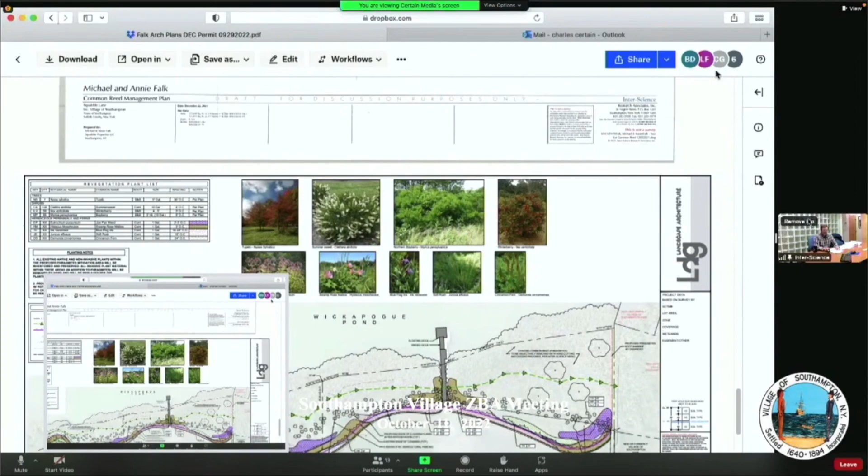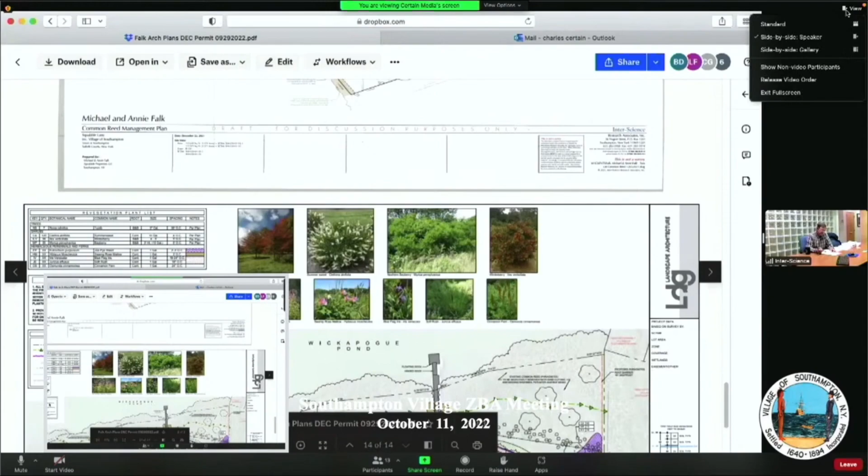Above the wetlands line, we have various wetland shrubs and plants proposed: blue flag iris, Joe Pye weed, soft rush, cinnamon fern. Those are parts of the passive restoration. But then there are native shrubs that will also be planted.

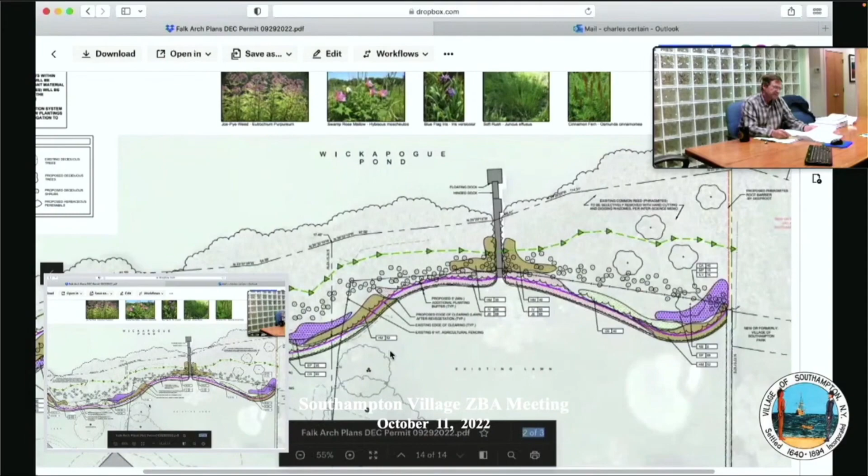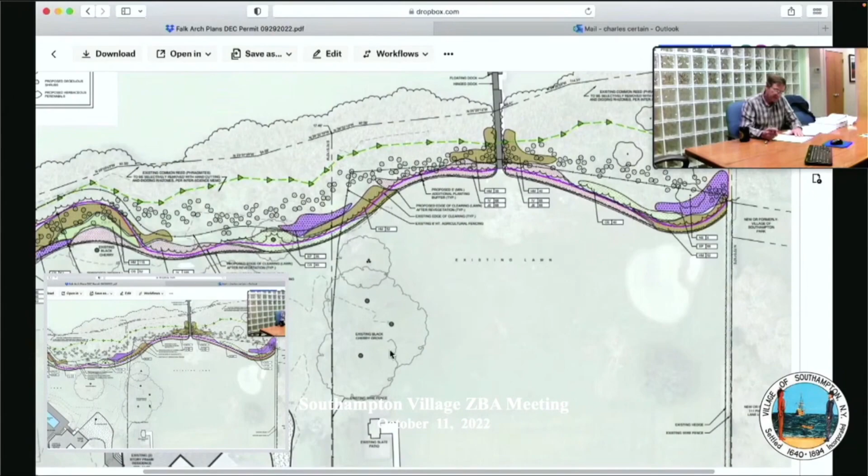There's an existing fence on 12 Squabble Lane, and we would like to retain that fence. On the other property, there is a fence that goes high up into the property, and it looks like an area that was used to put landscape debris over the years. What we're doing instead there is installing a new fence, and planting new wetland shrubs and buffer plantings above the wetlands line, and installing a fence.

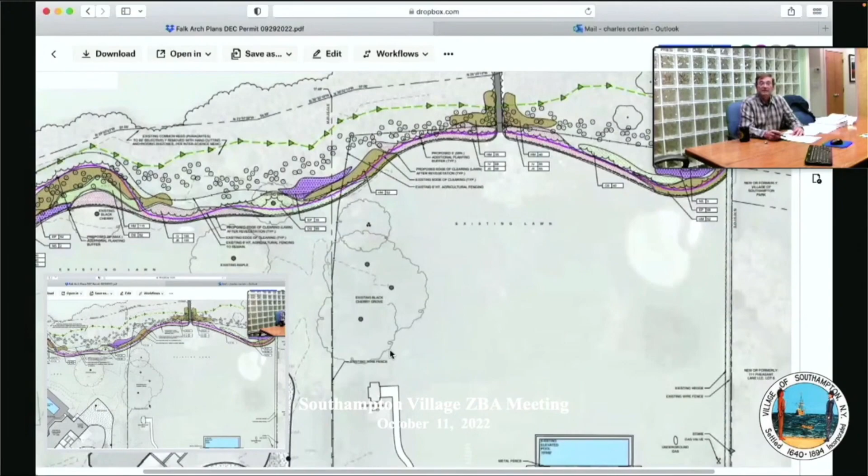Now, this property had been managed prior by Bruce Horwath with pretty good success. The only problem was for the people on Wickapogue Pond shoreline that had the permits to do that work, it wasn't continued. So the problem is finding property owners who are willing to continue the maintenance and keep cutting the common reed down until the whole thing succeeds. And that's what you see on the plans by the landscape architect.

LaGuardia Design shows plantings on the uphill side of the fence as well, and that is to hide the fence so they don't look at it. It's mostly swamp rose mallow, which is already present there and in pretty good shape. So what we're going to do is add to that.

The deer fence should be obvious. It's to encourage the deer to run along the shoreline and not in the landscape portions of the property.

There are two areas that need other attention, and those are root barriers on the north and south property: north side of the property for 12, south side of the property for 10. That is self-explanatory, but what it does is prevent the common reeds from coming back across the property line and reinvading

the new wetlands. When Bruce Horwath did the work years ago, it was very successful. There was a huge amount of freshwater wetlands vegetation that came back, and I went down there and looked several times. I don't really recall why, probably because I had clients in the area.

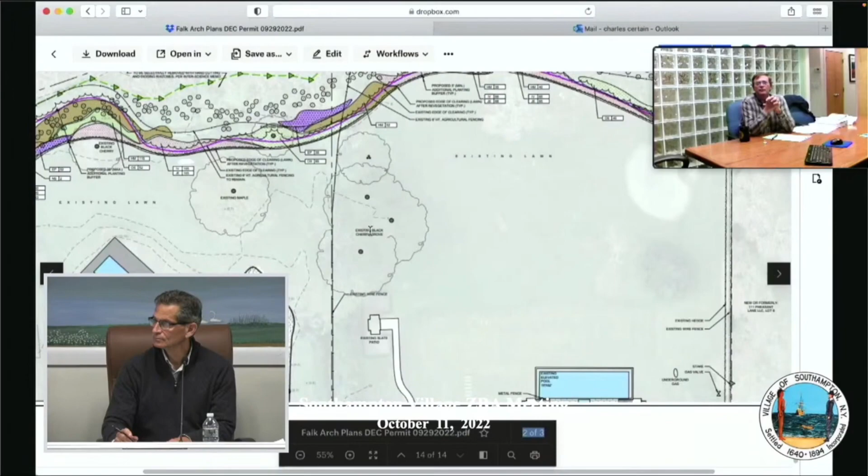But we're going to try to get that situation back in play, and we have two property owners that are willing to pay for the maintenance that's required for these kinds of projects. So Michael and Annie Falk should be thanked in some respect, because this is a good environmental positive project.

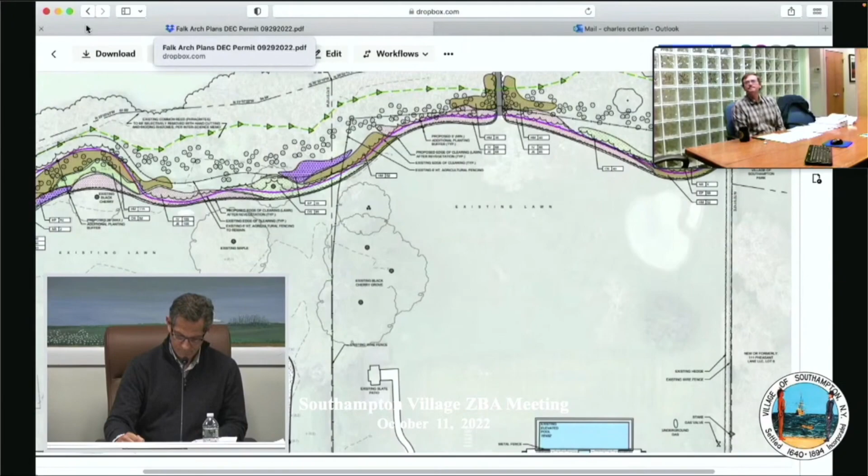I think we have given everything to the board that Chick Voorhis has asked for. So we would encourage you to close the hearing and issue a permit so that we can start the project, say, in January, February this year, using the New York State DEC permit and the village wetlands permit. I'm here to answer any questions you might have.

Chick, do you want to speak to this? Sure, what Charles suggested earlier.

I thought it'd be helpful also to supplement Jim Walker's presentation by going back through some of the materials we had talked about very early on. Jim submitted a very conceptual plan, and so we had some discussions in April and May, and it's been adjourned ever since then while he was getting the input of the landscape architect.

But at that time, we had suggested root barriers on each side of the property to prevent Phragmites rhizomes from coming into this property. That is now shown on the plans, as Jim said, but that was one of our original requests.

We had also requested that the wetland line be updated. That was flagged by InterScience, checked by my office, and has been verified, again, since the April and May meetings. We asked them to inventory the existing vegetation on the property so that we were ensuring that we considered

materials that were good and native and could retain them as part of the restoration plan. That has been done. You can see existing trees shown on the property, and also the narrative talks about the selective cutting and how that'll be handled.

We also asked, based on an original plan, if the buffer could be expanded. Keep in mind that this is a voluntary restoration of wetlands to try and increase the productivity and make it more environmentally beneficial. But since the alignment of the original restoration, Jim and his team did expand the buffering.

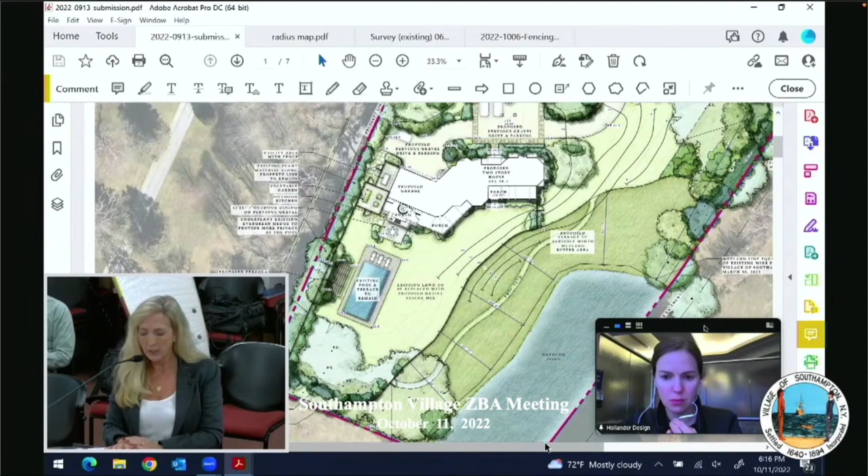Want to zoom in a little bit, Melissa? Sure. The other purpose, we were also asked if we could take another look at the pathways in the buffer. Originally we had more pathways, and they were a little closer to the wetlands. We've now reduced the pathways. They're only 4 foot wide, and they've also been shifted further upland. We have a net reduction of 72 linear feet of pathway. Originally there was 285 linear feet, now it's 213 linear feet.

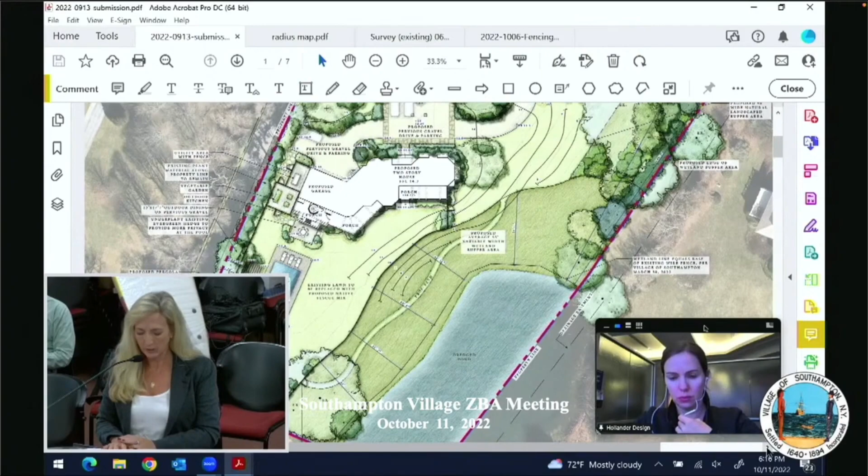If you could now point us to the landscape, natural landscape area. During this process, it was brought to our attention that apparently during one of the older reviews and permits issued in 1997 for the swimming pool, not only was there a requirement for a 20-foot wetlands buffer, but there was discussion about a 50-foot natural, quote-unquote, landscape area, which to this date neither Chick nor I understand what it means. When we met on site, we didn't understand the purpose of it, because environmentally it doesn't seem to make sense, but either way, we weren't made aware of it until this whole process started. There was a certificate of occupancy issued June 28th of last year to the current owner when he purchased the property.

Again, not aware of this. There were no violations issued in the title report. My company wasn't involved in the purchase of the property, so we hadn't done a FOIL. During this process we did file a FOIL, and we were given a copy of the original approved map, which showed the 20-foot buffer and the 50-foot landscape area. But there was nothing about a violation. I don't think Chick had the same situation I did, where the violation wasn't found until we actually physically asked to see the file, which I think was June or July, where there was a piece of paper from John Foster stating that.

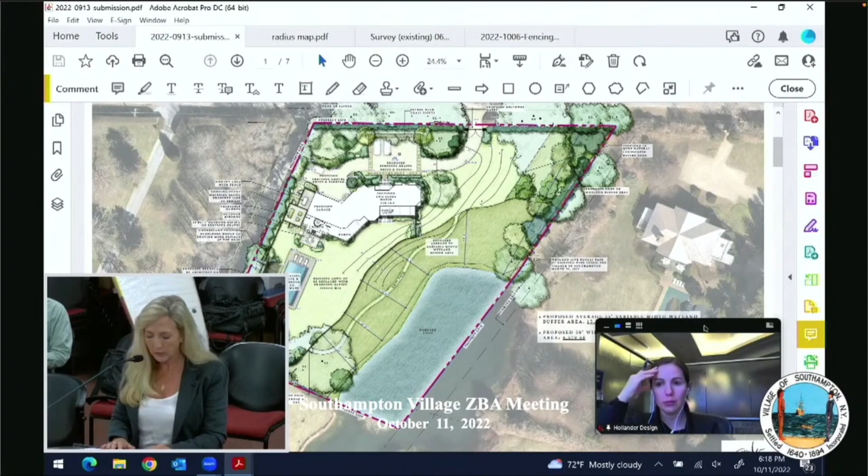That being said, we've now come around, and we would like to revegetate that area. We would like to reestablish a 50-foot wide natural landscaped area planted with native plants designed by Ed Hollander's office. That results in an additional 4,579 square feet of native plantings. The lawn that's currently there, since we're going to be doing site drainage, a new geothermal system and everything, we would also like to replace the existing lawn that's remaining, which would reduce the lawn area here, with a native fescue mix. So in essence, we're increasing the buffer by making all the lawn and the wetlands buffer native plantings.

Melissa, do you have anything you want to add to that? No, that was a pretty good overview. The only other landscape change that we made was to the fencing, but I don't know if that's still next on my list, or if you'd like me to address it. Okay, yeah, actually, well, there was a question, do we want to zoom in on the fencing?

So there's a question about the fencing along the driveway that's to the west of the property that leads to the back flag lot. We actually went out, and Melissa, could you show the photographs? We submitted this to the board.

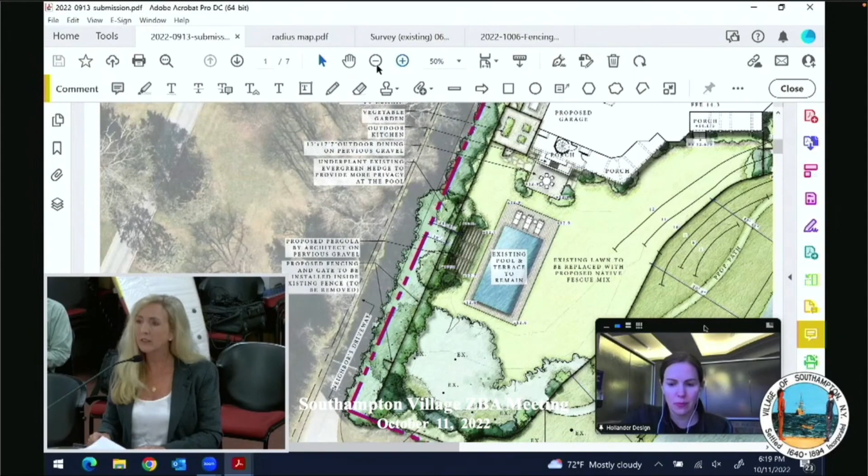We actually had that property line staked out to confirm that the trees in question were on our property. We submitted an 11 by 17. If you zoom in on the upper right-hand corner, you can see the stake there next to the call box.

The property line is pretty much 2 feet off of their driveway, so all that vegetation is correctly shown on our original survey and is on our property. However, just to be helpful, we've decided to install the new fencing about 10 feet off the property line and inside the existing fencing, which will be removed. The existing fencing is pretty much wire fencing, you can see it right there.

So we're going to install it inside from there, and we will maintain the southern fencing that's along the property line between us and the flag portion of that property.

Ms. Stevenson had a question about if we could go to the FEMA, the zoning compliance map. Sorry, there's a little delay. It's okay. Can you zoom in on where the FEMA is on the existing house?

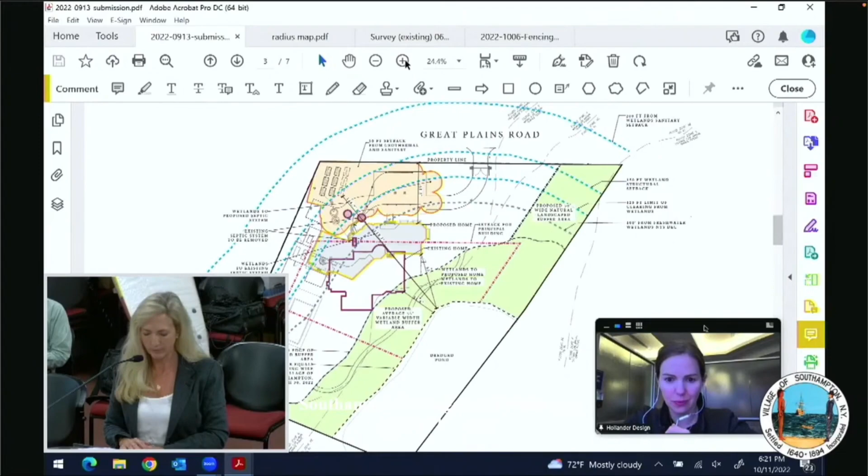With regard to the other structures, we're not making any changes from last time we spoke with this board. We're still asking for the front yard relief to maximize the wetland setback. I did provide an analysis of the 5 criteria for requesting that relief. I can go through it again, but it has been provided in written form.

The main reason is really to improve the environmental conditions. Again, the proposed house height is going to be 29.7 feet, where 35 is allowed, and the current house is 33 feet.

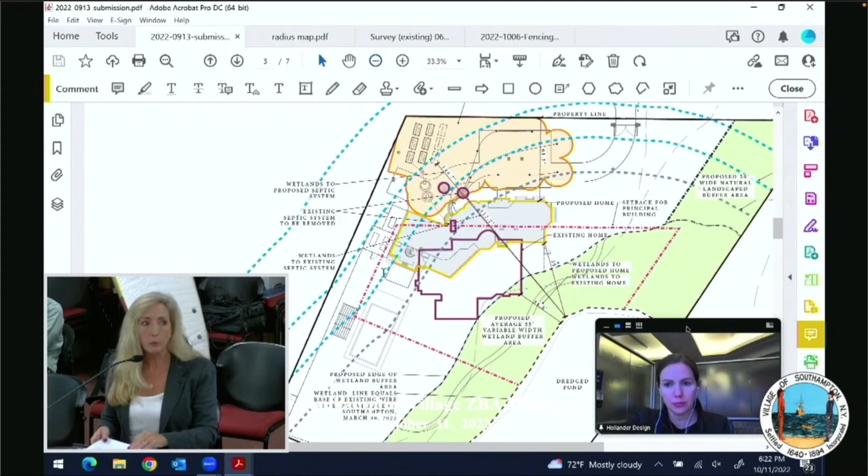The other variance we were asking for is for the open-air pergola, which, if you combine it with the 20-foot wide flagpole, then it actually exceeds the 30-foot required setback. We feel the pergola, since it's open to the air and open on the sides, is as far away from the wetlands as possible, so it's between the swimming pool and the driveway to the west.

Want to go to the next picture? We can talk about the planting plans. Or which one do we have next?

This is just our overall drainage and grading plan. Again, we're going to be improving the septic system. You also should have gotten the updated wetlands setbacks, which are the same. I added onto that the proposed buffer area for both the natural landscaped area and the wetlands buffer.

Melissa, you want to go over your plantings? Yeah, just one thing to note here: the last time we were in front of the board, Chick made a really good note about limiting disturbance to habitat within the wetland, and we really took that to heart, not only in the reduction of paths, but we went through and added a lot of native shrubs as well, so that we could provide more shelter for native fauna in this space. So we've added additional planting to the buffer since we last met.

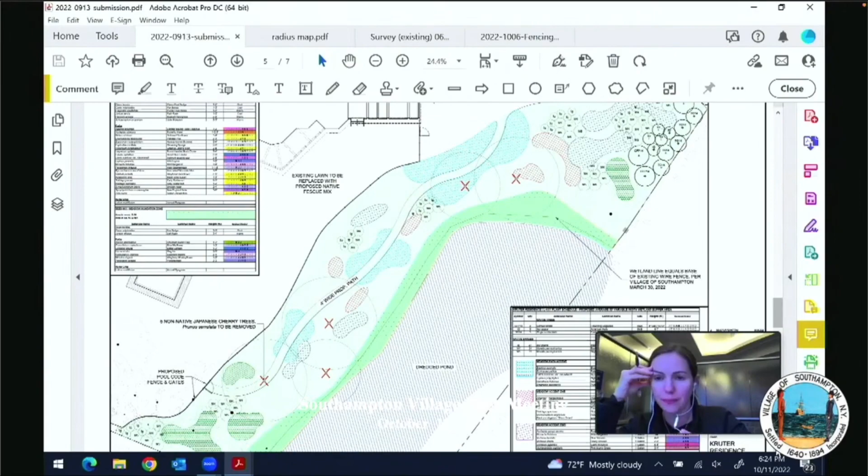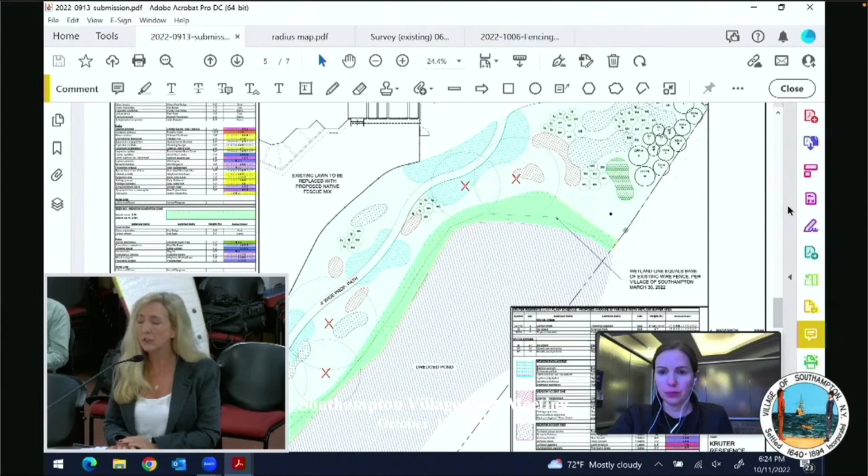I also want to add that in our original application, I don't know if this got lost in translation, we did provide the board with a tree inspection plan done by Bartlett tree experts. They inventoried the 5 cherry trees that we wanted to remove because they're in poor health, and they did a whole inventory and agreed with us, and they had been maintaining the property for many years. Melissa also provided a timing and methodology for the wetlands buffer installation.

You want to go over the natural landscaped area, the planting plan?

Since we last met, we added planting to this natural landscape buffer area. This is 50 feet of planting on the northeast property line, and we're taking a lot of the same material we were using in the buffer and extending it.

So this is just a natural extension of the remediation we were already doing here. Do we have the radius map next? Okay, here I just want to point out where the property is, it's kind of hard to see on this. Do you want me to zoom in? Yes, please.

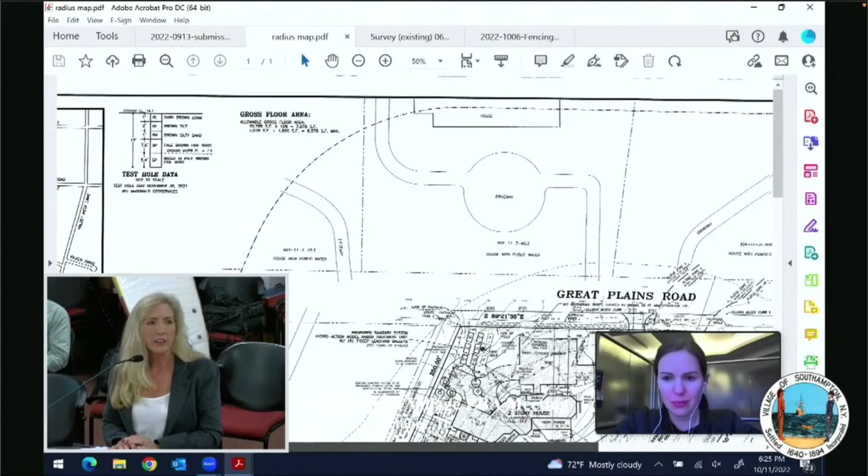I just want to remind the board that when our client purchased the property, can you go to the drainage area? We've actually staked out the drainage area. Our client, when he purchased the property, had thought that he owned all the way to the hedgerow, which we've talked about at the last hearing.

So that 20-foot wide area is going to be allowed to passively regrow, and then we're doing the 50-foot on top of that. So between the wetland area, the landscape area, and the pond, almost 45% of the property is going to be native natural area.

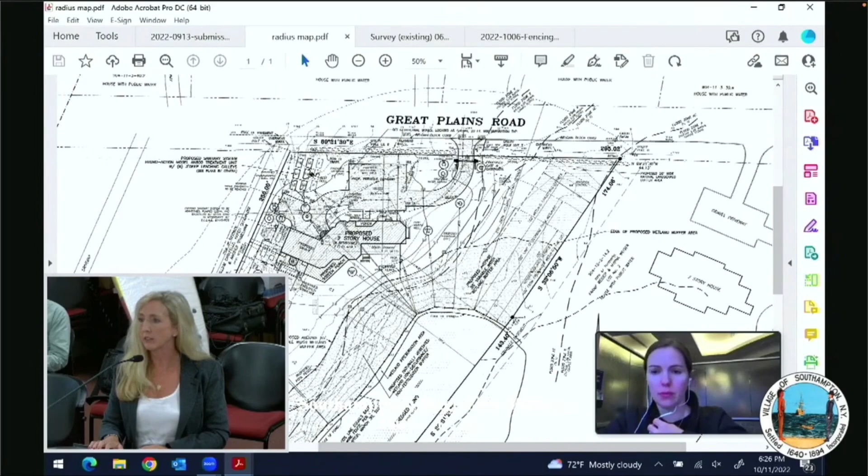I also wanted to show where the southern fence line is, just so they understand the area we're going to be keeping, that one southern fence. Yeah, right there, and that's just going to be maintained. We're here to answer any questions from the board.

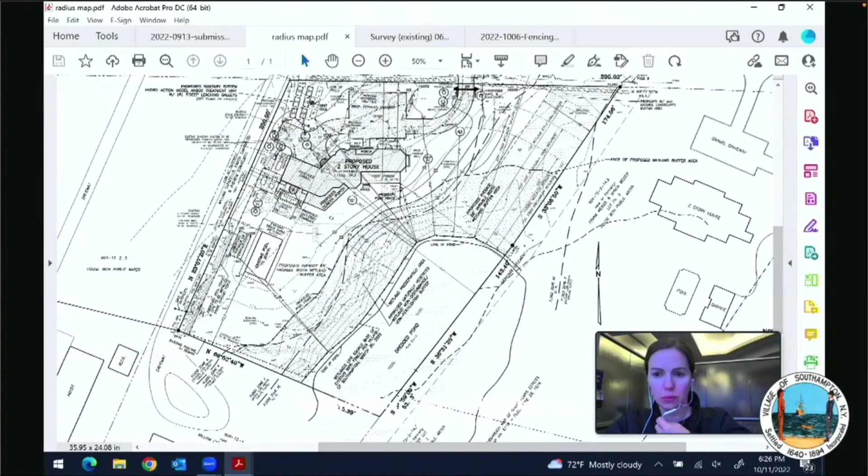Do any board members have any questions? Julia, Susan, do you have any questions, Luke? No, I have no questions right now. Julia or Susan, do you? Not now, Mark.

Okay, so I'd like to hear Chick's comments on the plan at this point. Why don't you go, Chick? Sure, so this does have some history. My notes show that... you might have to step up. Want me to go up there again? Thanks, Charles.

There was quite a bit of history. My notes show that we had originally adjourned this in May. There were some discussions that involved having the applicant seek a front yard variance to expand the setback to the wetlands. You may recall the original application met the 80-foot setback, but the house was rather close to the wetlands. So we further discussed it, talked about looking to comply with setbacks as much as possible, or seek a front yard setback, which they have done, expand the natural buffer, and then research that 50-foot easement to the east.

So we did receive updated surveys. There was a resubmission, the property was reposted, and Melissa presented it this evening, basically documenting all of those changes. I think it would help, and I hate to put the burden on the applicant, but there was a really helpful comparison chart that is part of our record, and I think it might be good for Melissa to go over that here at the meeting, because there's existing sanitary systems, there's proposed drainage, there's expanded buffers, and that information is good to have on the record, not only in the file, but in the written record.

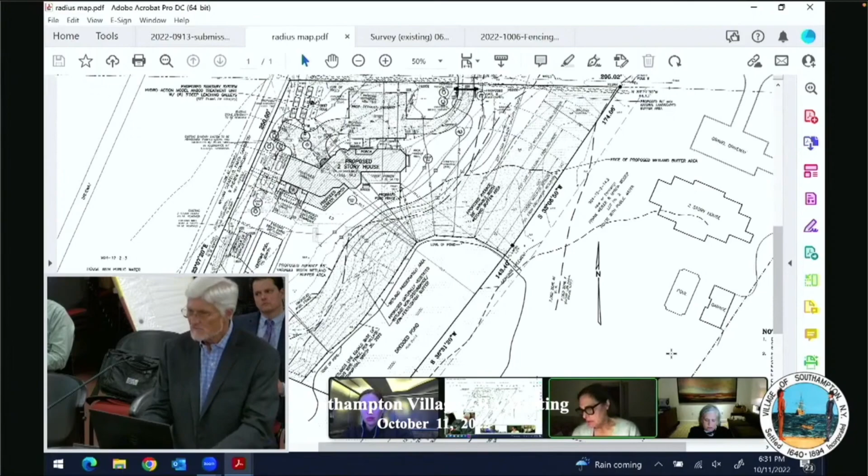I don't know if, Mark, you want to hear about, I thought that setback comparison chart was useful. We do have it in the record, but Melissa can go into it in more detail if it's helpful. Actually, what I'd also thank you, Chick.

The only thing I'd like to also state is that this property, which is unusual in this area, is actually undersized for this area. It's an R120, and this is a 70,785 square foot property that's also impinged with a man-made pond. So we really have tried to balance working with this board to get a reasonable house that is not maxed out in size or height.

The other thing I'd like to add that I forgot in my presentation, and Melissa forgot, is that if you combine the 50-foot new area, naturally planted area, we actually ended up with an average 75-foot wetlands buffer. So if the board would want, we could covenant that. Now, remember, the original wetlands buffer for the pool was not a buffer per se, it was just a net, but after planting it, we are more than willing to covenant both the 55-foot average width buffer as well as a naturally landscaped area, if that would make the board feel a little better about all this.

Since the lot is undersized, did you qualify for 4/10 relief? No, because of the street width. Got it. And I could go over some of the setbacks.

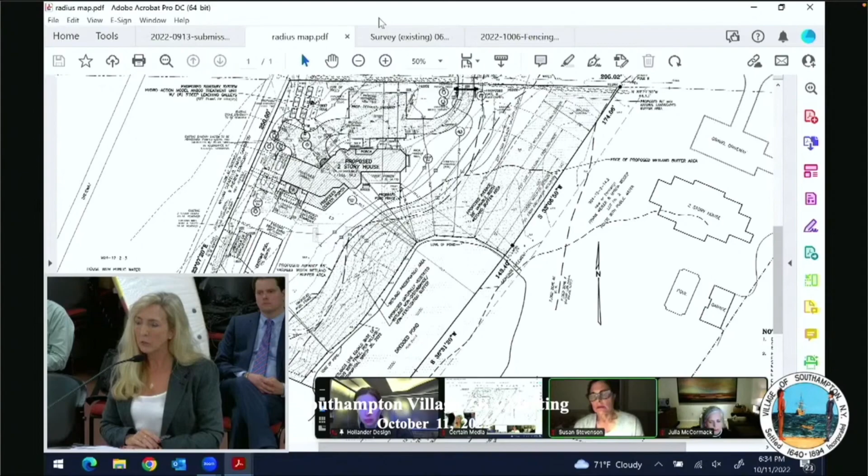But isn't the fact that, as I was talking to my associates, we weren't aware of this, the client was not aware of this, the client's closing it, we didn't represent the client, the attorney wasn't aware of it. So how are we supposed to be aware of this? That's number one, but number two is, aren't we, by us being here, rectifying it, because we would need a wetland special permit anyways to do the work. So I think this is a win-win for both the village and for our client.

And again, we're willing to covenant the buffer that was established for the swimming pool, which is only 20 feet, was not covenanted actually. So now you're going to have a 55-foot covenanted buffer along with the additional native planted area, which ends up in an average width of 75 feet on a very small lot. Again, 45% of the property is going to be natural. No, I understand.

So the question I have for either you or Chick is, and I understand you were not aware of it. I'm not saying Chick's a mind reader, I can't, but it's in the file, okay?

The reason why we're aware of it is because there's a file that has a decision from the zoning board that required compliance with a condition, and in addition to non-compliance with the condition, there was a letter issued by the building inspector notifying the prior property owner that the property violates this condition or does not comply with this condition. Right. It's in the file.

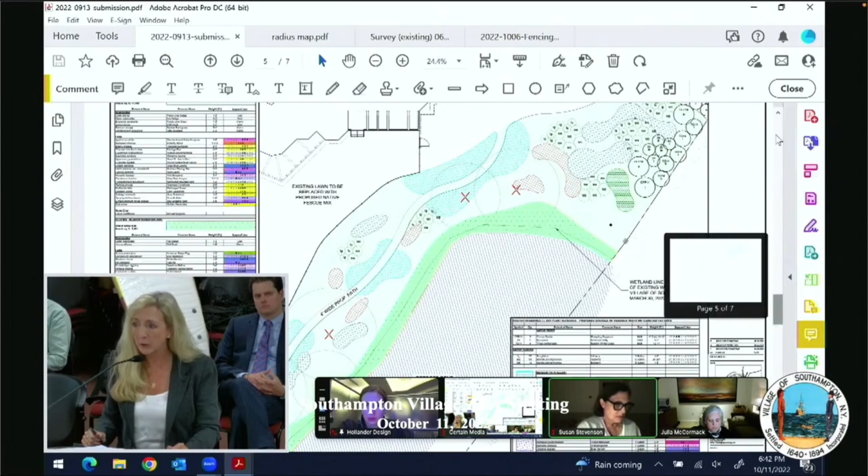I think when you have the net, as it's moving here, as it waves around and everything, it looks more natural. It looks like a more natural shoreline. It's more aesthetically pleasing. It provides just as much environmental benefit with habitat, with food, with shelter for the animals. And on top of covenanting now that 50-foot, like I said, covenanting it, you're going to have an average 55-foot. And that provides a wildlife corridor from the street down to the pond and around the pond.

So I think there has to be a balance. That's what I'm trying to balance. If we had a bigger property, heck, I'd give you 50 feet, but I don't. And we're trying to have a little... The balance that we were trying to...

Facilitate was to say to you, you can go 60 feet from the front yard, okay? I thought in exchange for that additional 20 feet, you could accomplish a minimum 50-foot wetlands buffer, okay? But it is greater than 50 feet on both.

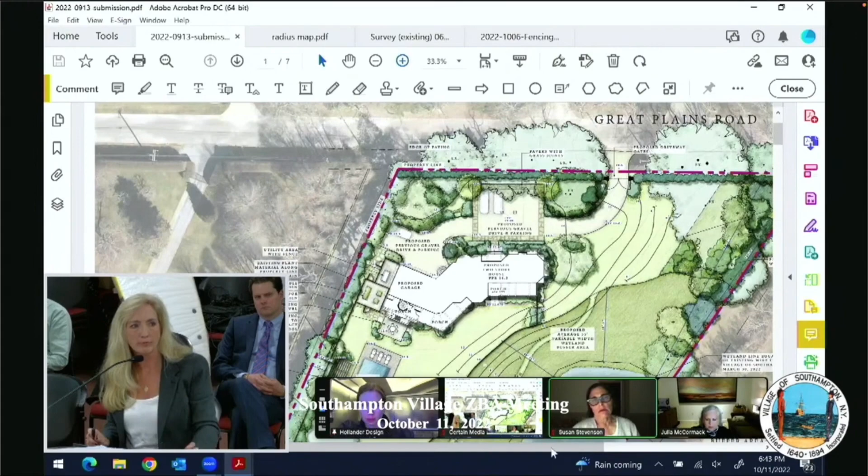Actually, Melissa, we have pictures on - is there any way to bring it up so you can, the whole lower end - actually, can you bring it up higher, Melissa? I guess, what's the buffer at the northwest corner of the pond and the southeast? See, it flares out. Can you bring it up higher? Yeah, let me know if you can see it. No, I can't, you have to bring it up higher.

There you go. We're doing all plantings down there, trees there. Let me just step away here. This isn't necessarily buffer, but it's all planted. And we bumped this up and everything, and we're trying to make something that the client's gonna love to maintain as well. That's half of our battle too, and Chick knows this too when we have clients.

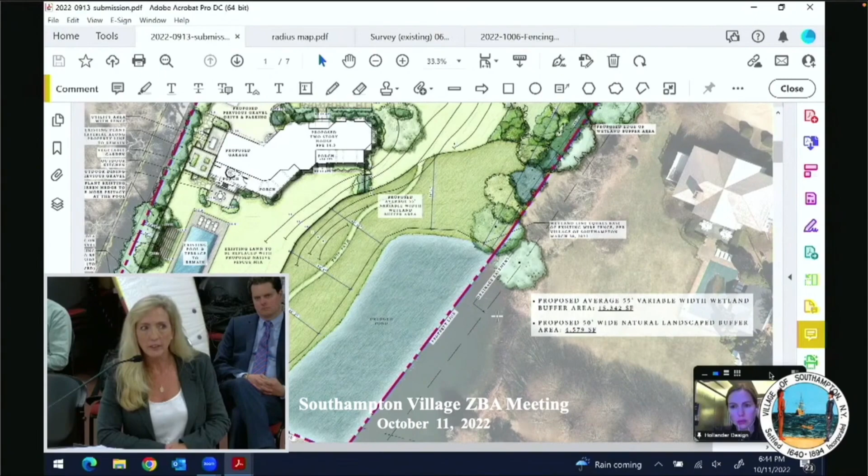And we really thought it's a beautiful project. I really thought with the additional planting, the shrubs - I'm sure Chick can tell you how, it's not an inexpensive restoration. And I'd love to have Chick comment, but I think what we're showing here, especially adding in the 50-foot natural area that we're going to covenant, provides a lot more benefit, I believe, than just having a straight 50-foot line around the pond.

Melissa, what's the buffer depth at its narrowest? Melissa, do you have that thread? I can't read this. Yeah, it's 43 feet 11 inches. And is that at where the fence is to the house to get around so they have a gate?

Yeah, I think it's right there. Yeah, right. So this is 20 feet off of the corner of the building to the edge of the wetland area.

I just want to add one note to Melissa's review of the buffer area. The one thing we try to keep in mind when working on these variable width buffers is that when we expand them in areas like this, we're trying to do that where we're limiting runoff from the property. When working out the grading plan, the majority of our runoff is towards the back of the house and the side where you see some of our grading.

So increasing that allows for more area for that water to run through before it gets to the pond. There are some benefits in creating these variable widths, so we can create larger zones for that runoff to go through, for absorption. That was one of the things we were keeping in mind.

Chick, would you like to comment? Chairman, would you like? Sure, go ahead, Chick. Well, yes, both of us, so.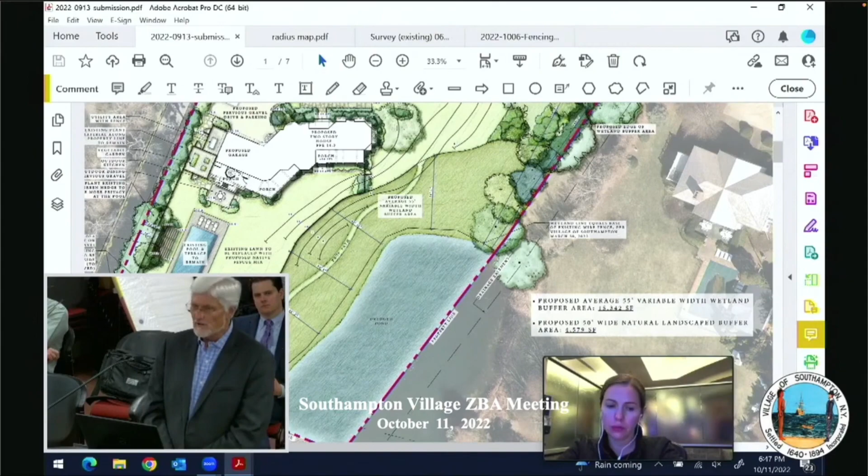Also, one of the local South Fork jurisdictions, the village of Sag Harbor, actually codified kind of an average buffer concept. We don't have that in Chapter 116. It's pretty explicit that we look for the 125-foot landscape, 150-foot structure, 200-foot sanitary, and clearly this does not comply. So those are kind of the two sides to it.

I've heard the environmental discussion, and I agree with a lot of that. We are improving the condition, but I have to go back to some of the original challenges that this board gave the applicant, to get a 50-foot buffer.

And we have an average 55-foot buffer, but we have a minimum that is less than that. So again, I would challenge the applicant to do better and get closer to what has been requested and what we've talked about. That's really what I can tell you at this time.

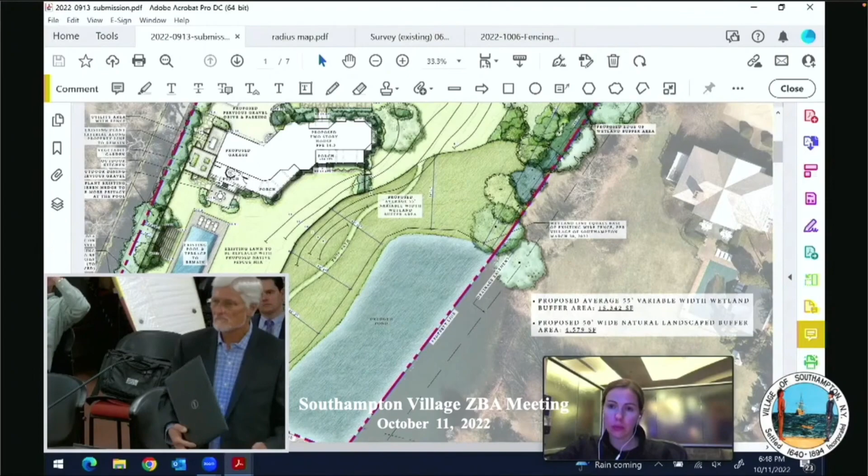Let me ask this question - it's a tough one. In other jurisdictions, is 50 feet the minimum buffer you would recommend, or is it sometimes 75 feet? The village of Sag Harbor has a 50-foot wetland buffer, but it's a very different village. There are many small lots, mostly developed. So that's kind of the difference there.

The DEC just has a 100-foot jurisdiction area, and anything in that area is subject to permits. If you're in tidal wetlands, they have a minimum setback. But none of their regulations have a minimum buffer, which I find interesting, but they look to get as much as possible. And obviously the town of Southampton is very similar to the village of Southampton with 125 feet.

So what might the town require with respect to a buffer? Well, I don't want to try and get in the head of the chief environmental analyst, Marty Shea. He's very tough, and he looks for the maximum, and he would look for maximum buffers. I can't tell you the number he would look for here, or how he might arrive at a decision on something like this, but again, we're very close.

When Melissa and I were listening, both of us arrived at something like 40-something feet. I'm just wondering - the question might be, have we already asked for what any jurisdiction would require as a minimum, which is 50 feet?

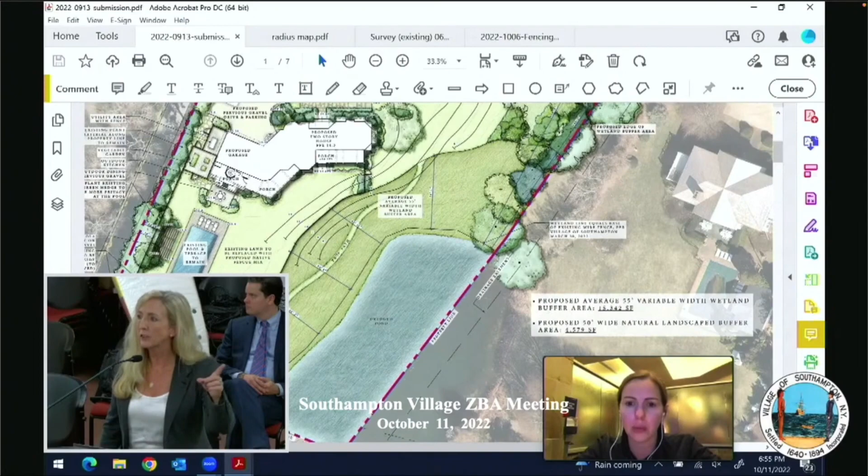It might be helpful from a comparison standpoint - not to change what you've done on the flanking sides, but if you extended to hit 50 feet at every area, what would your native coverage be? Because it's probably, if you said 43%? No, 45, it's 44.5. But it's probably only 47 or 48. It's actually less, because when we did the square footage of 50 feet around, this is actually more, because we were trying to bump up. So I can get you those numbers, I thought I had them. Leave the bumped up areas, leave that general outline, but just get to the 50 feet - I think it would just be illustrative of how much you've done.

And I don't think... I think it would show that. 50 foot plus the bump up, that's... Oh no, let me start over. So you want me to put a 50-foot radius around the wetlands and then on top of this? No. Okay, I'm on your team on this one. Okay, so I'm trying to understand what you want.

So you have a buffer line that in some areas is very deep, and in some areas comes down to 43 feet. If you kept the buffer line where you have it drawn now, in all the locations where it is 50 feet or more, and then also where it came down to 43 feet, made it 50 - you just want a line so you can see how little we're talking about here in comparison. Yes, I got you. We can do that.

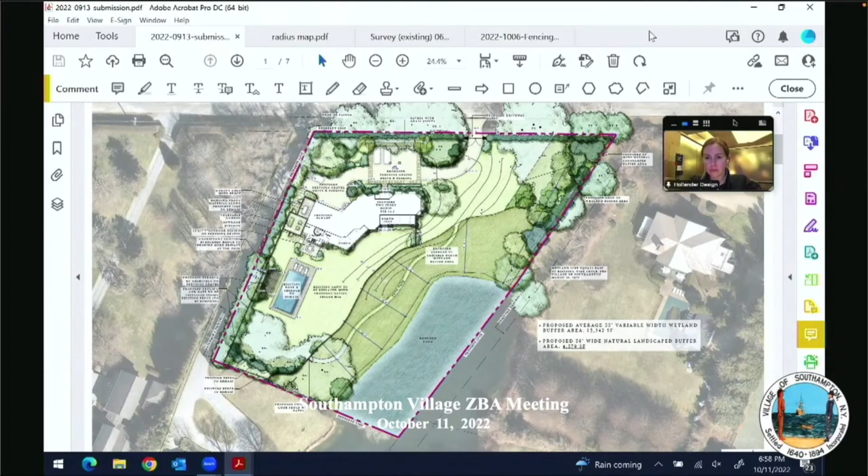Not now. Some of my concerns were, when you look at the house plan and the parking, that moving the house toward the street, I believe, requires that there be a sense of the streetscape. And there's a lot of parking and cars - it's huge, and then a garage, I don't know. I think it is not fair to the rest of the community - one thing would be to move it up and be a good neighbor, but I don't actually feel this looks like a good neighborly plot.

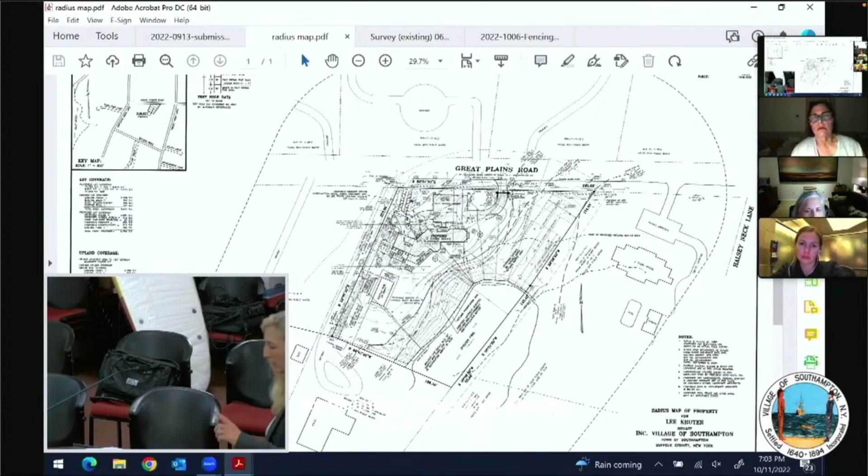But we're fronting on a flagpole lot, and like I said, we have existing very mature vegetation that's between us and Great Plains Road. Melissa, can you put up the elevations of Ed's architectural plans?

You'll have to give me a second here to pull that up. If you recall, in the current property the house is straight up and down the whole front facade. The way Mr. Siegel has designed it... oh, now we've got yellow.

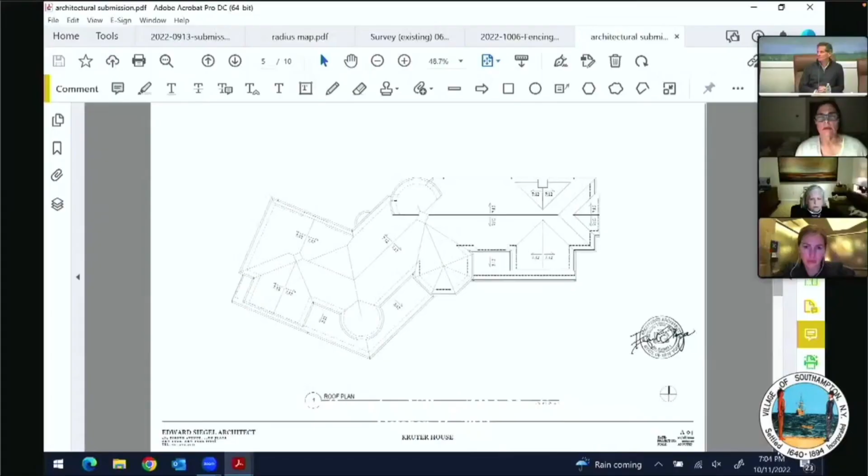That's the front aspect of the house. Now show the side, show how narrow it is, please. And that's how wide the house is. You can see how it steps back from the front.

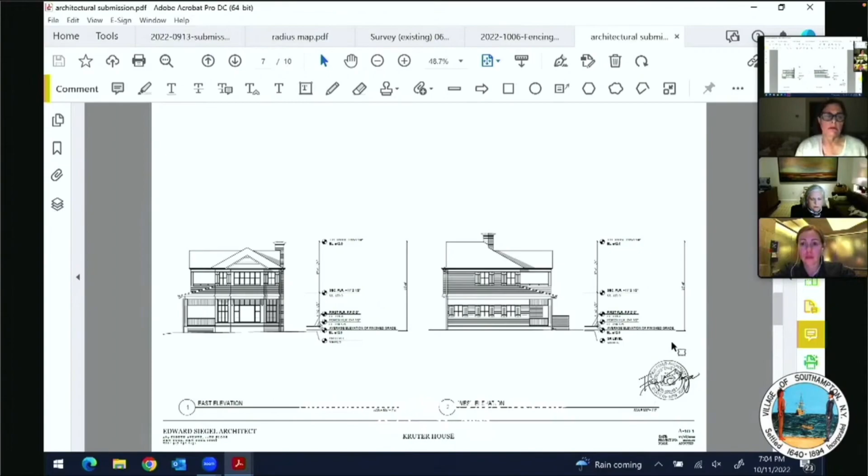Do you want to discuss that? The house has been purposely zigzagged in plan so that the part where the cylinder is, to the left, is what you'll see predominantly from the street in front of the motor court. The part to the right of the cylinder is pushed back and defines a motor court in back.

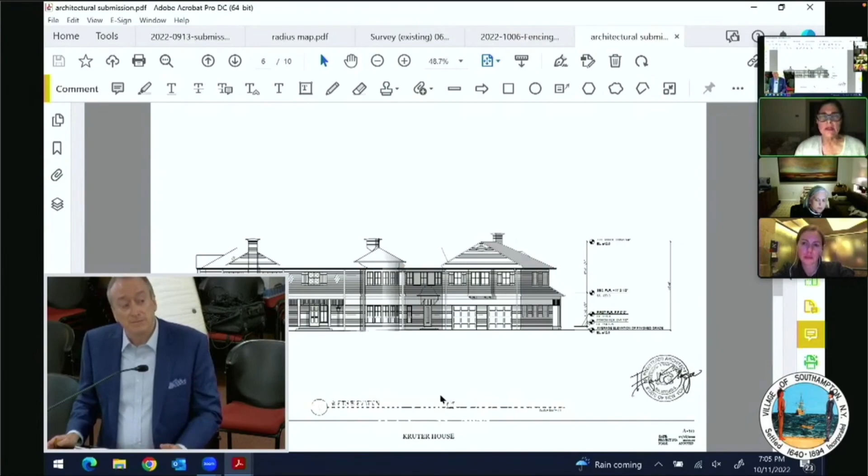You'll hardly see that at all from the street because the landscaping will be blocking all of it. So in fact, the actual elevation that is street frontage is from the cylinder to the left.

And I'm not talking about the house, I'm talking about the motor court. Do you have the landscape plan, the motor court, the drive, the thick drive? Listen, if you get... nope.

I would say, Melissa, check out how much. The last page shows the blow up in each of the areas. So first of all, the other houses you showed, which is really none of my business, are not as close. This is super close to the street, your parking court.

It really is. I realize you're trying to put a lot of things on this lot, including the house, but there's a garage, then there's this drive to the garage, and at a certain point, I don't have a good feeling about the neighborliness of this.

Because the fact that you're allowed to move the house up does not mean that then you're allowed to jam a lot of stuff up in front of it that's not like the rest of the community. Something's got to give, I feel. I don't know what you should do, but I don't feel good about it. I don't think it looks appropriate for the street, really. Nowhere else would you encounter cars literally up by the street, even hedges, I don't care what kind of stuff you want to plant. It just doesn't, it's too much.

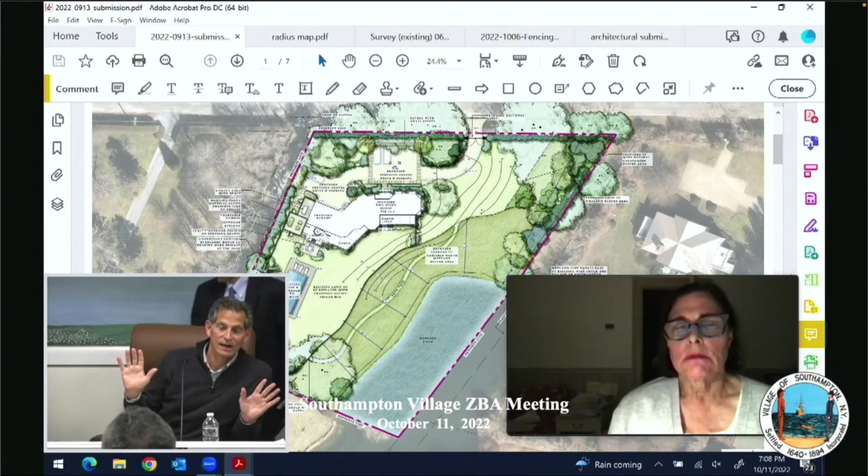Doesn't village code though allow you to have parking in the corner front yard as long as you provide adequate screening? No, 100%. Yeah, it's just village code doesn't allow you to put the house 60 feet back. So there's some resistance on the board to saying, okay, we won't allow 60 feet. Move your house, comply with the 80-foot setback, or soften the impact that it has on the street.

And what you presented is just not a softening, it's kind of increasing the impact of moving the house closer to the road. You can consider that any way you want. We're going to leave the application open for all purposes anyway, but that was the response from many board members, that hey, moving it 20 feet closer to the street, that's a major accommodation. Let's see how that works. And then when you show the motor court there, it's like, well, we're not so sure it works then.

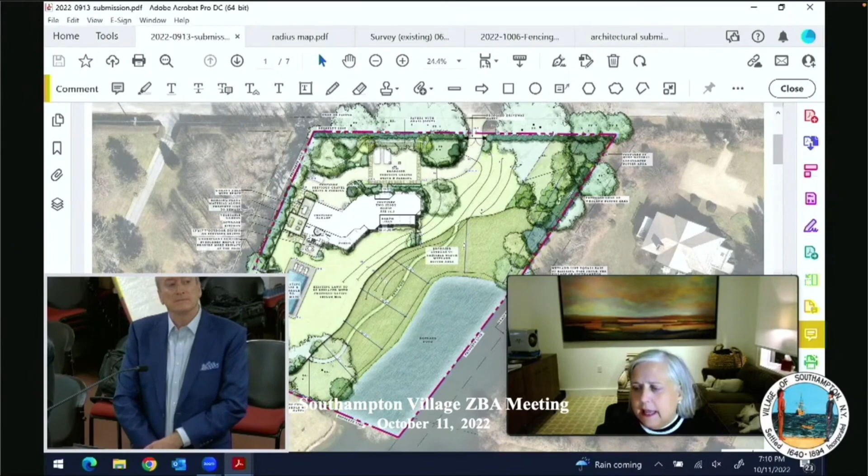Melissa, hasn't the motor—and at that time, Mark, frankly, when we made those statements that we could imagine the house being built closer to the road, we didn't actually have a clear understanding of what was happening or not happening in the buffer, in terms of the space, in terms of the compliance, all of that. Apparently none of us did. But I think for myself, leaving this meeting tonight, sorting out what would bring the property into compliance, and then adding on what else is being requested, because the two are now completely linked together, because the suggestion that was made was in part so that the buffer would have a better opportunity.

We had no idea that we were making that accommodation as something to consider. It certainly was not a settled issue when we knew that the property was out of compliance for many years. I think that's also a piece of this tonight, is there's a lot on the table here that's being requested, half of which is just bringing the property into compliance. And I think sorting through some of that, for myself anyway, is going to be important. And after I've done that, will I really be able to know what my questions are about the property as a whole? That's my 2 cents on this.

Do we want to see, do any neighbors or anybody from the public wish to be heard? Yes, I have a Christopher Lawrence hand up.

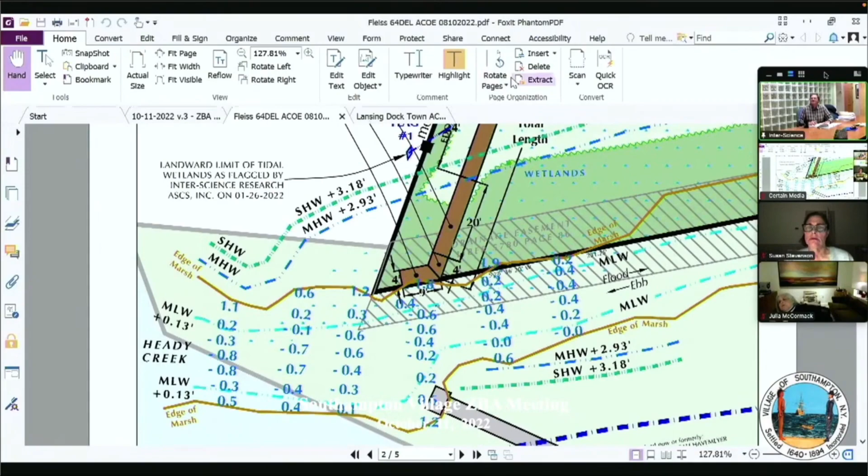See, in the aerial, on this map you have the brown line as the edge of marsh. But in the aerial photography, it looks as though the dock to the south does extend further into the water. Maybe the water has receded, or maybe that was just when this photo was taken. It appears to me that the docks are going to be very close together.

And then the second question is, when you say that the proposed dock isn't going to come into the creek, does that mean that the family is going to be getting on and off the dock and trampling around in the wetlands?

No, but the way that you're thinking is appropriate. Go to the air photo. We look at the dock on 405 Captain's Neck Lane. The drop platform, which is a 4-foot by 6-foot platform, sticks into the water. At the Andrew Fleiss property on 64 Down East Lane, the drop platform will go right at the edge of the marsh, with a ladder down to the water. No, they won't be trampling on the marsh or have a reason to. Basically, you drop a kayak into the water and step down the ladder into the kayak, and you're in the kayak.

And the docks aren't going closer together. There's 24-foot width, of which 405 Captain's Neck Lane occupies 8 feet into that creek, but the dock at 64 Down East Lane will stop at the edge of the marsh, and the property owner's family can use the kayak dock to launch a kayak and paddle out into Heady Creek.

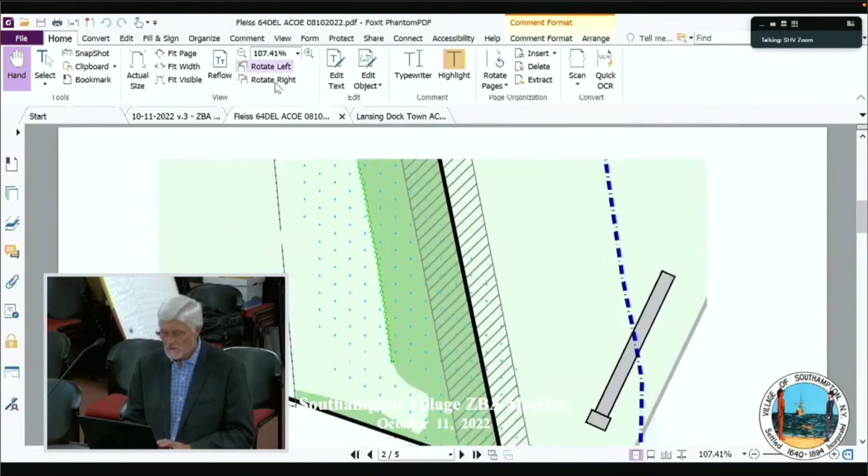We also have the mean high water here, spring high water here, and edge of marsh is this brownish line—basically the platform is within the edge of marsh. And if you look at the cross section, which I should be able to go to, but I have to reorient the view. Let me see if I can get there.

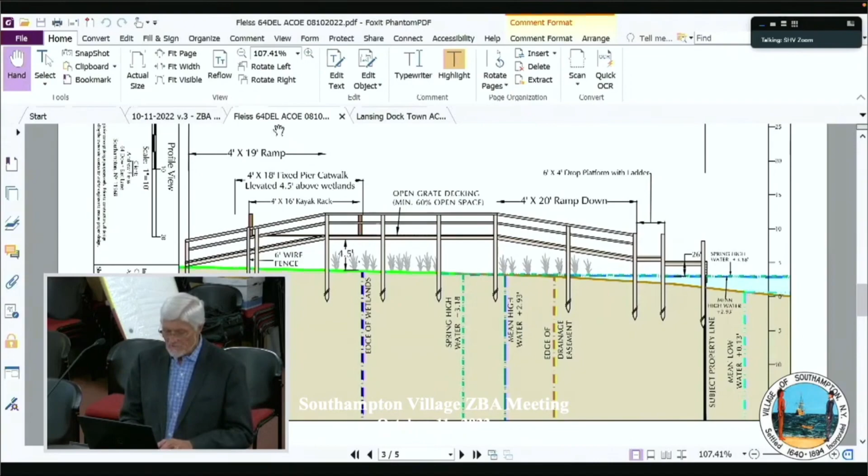So this is showing spring high water, mean high water, and the edge of marsh is roughly in this area, about where the platform is. I have concerns about the impact of this structure on wetlands. It is open grate decking, which is good. It is elevated where it can be, as you can see in the cross section, to allow vegetation to grow underneath.

But I think the orientation could be improved on this, and I would ask Jim to look at that. Also, looking at the aerial photograph, we don't have the luxury of Suffolk County GIS still, so I'm using a Google aerial. There are some trees, and it appears this is roughly the property line. There are some trees in the area where the proposed dock is going, and I would want them plotted at the very least and avoided as part of the design.

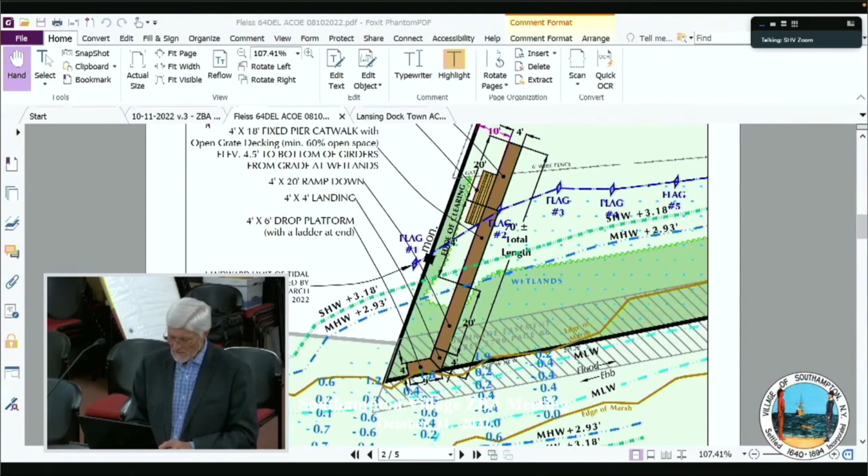And then certainly Luke's comments about the 405 Captain's Neck dock - these are pile-supported structures, so they do allow water to come in and out. When you have a dock, you do have some potential for scouring around the vertical elements, the piles, but it's pretty minimal. I'm not as concerned about that as I am the configuration and potential conflict with that dock.

Now let me just do a new share again and see if I can get to the original permit plan for 405 Captains. In the old days I never would have had all these tools, but now I feel like I'm fumbling. There it is.

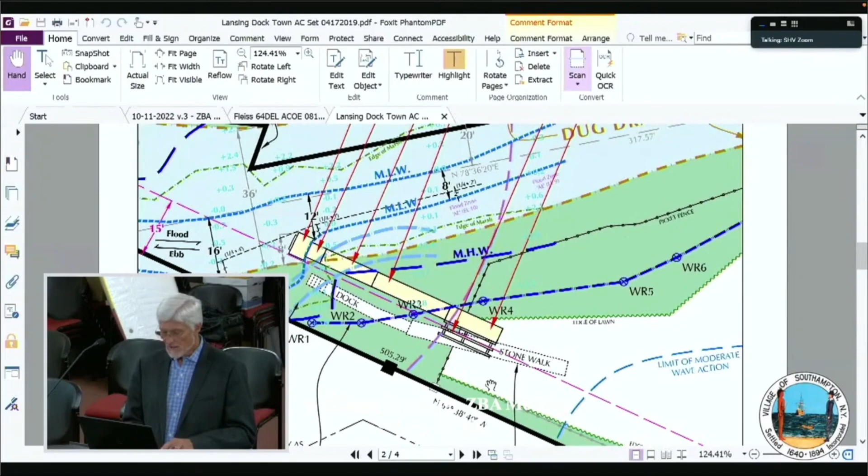Okay, so here's the permit plan that Jim said he was involved with at 405 Captains. I believe it was approved in 2019, and there was a prior dock there, which I think was part of the consideration at that time. It was a similar alignment. This one does go beyond the edge of marsh, where the downstep platform is. It is not perpendicular, it is kind of diagonal, but again, there was already disturbance, and I think that was weighed into some of the consideration. The kayak rack is well beyond the wetlands, in an area that was, for the most part, edge of lawn or already disturbed.

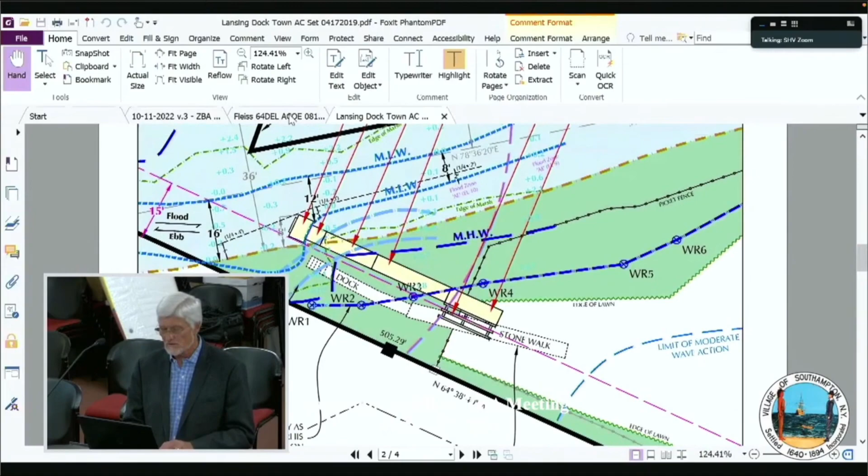But that's not really what we have with the current application for 64 Down East Lane. So those would be my comments. Let me just see if there's anything else.

What's the aggregate length of this kayak dock? I'd ask Jim to scale that off if he has his plans handy. 70 feet. It probably adds up based on the description here. Oh, yeah, we do have that - it's right on the plans. I'll gladly walk you through that if you like.

Kayak rack is located in an area of Phragmites. Typically we are told by the state to put a kayak rack in the upland portion of the property. It's above the wetlands line, in an area that's a pure stand of Phragmites, and it's an open frame structure. It has three 3x6s across the 4-foot width of the proposed structure, and it holds kayaks and canoes - two kayaks or two canoes - in an area where you simply put the kayak on the dock and pull it down the dock assembly.

The 4-foot by 20-foot ramp up - the reason it's 4-foot by 20-foot is that docks always used to be designed at 4-foot by 12-foot ramp ups, but we are required by the Army Corps of Engineers to elevate a dock 4.5 feet above the grade of vegetated wetlands to the bottom of the girder or the top of the ledger board. So the reason for the long ramp is Army Corps regulations, which are well-founded and probably not flexible in any way, shape, or form.

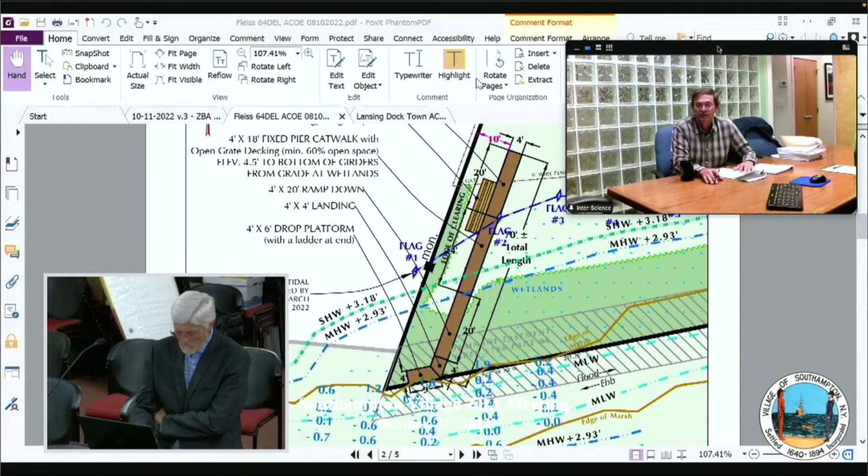And I have all that paperwork, Chick. I don't recall exactly where I got it, probably from Andrew Fleiss, and it's more documentation than I could send quickly. But if you want a full copy of that stuff, we'll forward you an email and give you all that information at once.

Chick, I don't think there's any problem with the subdivision that underlies these properties, and I think the drainage easement was smart. Why the property lines laid out exactly like that, I'm not certain, but I don't think it causes any real issue to this particular application, and we would certainly share it with the board. I already have it.

Last question, just looking at this aerial photograph and the lawn areas, some of the landscape beds - would the applicant consider mitigation in the form of lawn reduction and buffering to help offset some of the impacts of the dock structure? I'll speak to my client and report back to you in that time frame that you may want to continue the hearing.

Chick, I have a few questions. How does this dock compare to the dock we were just looking at? It seems like it goes up, levels, and then goes down. The dock at 1377 Meadow Lane seems a little bit simpler. Why isn't this as simple as that dock?

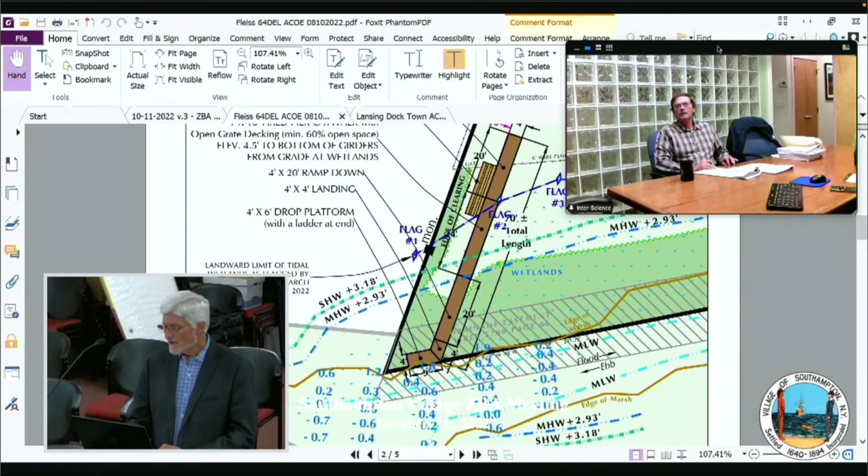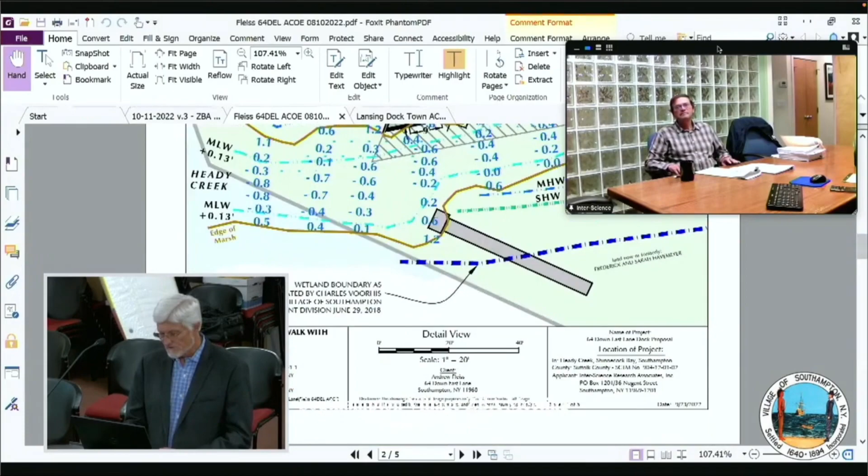What about the topography - I know Jim will explain this in greater detail because he's dealing with all the other agencies. But in this case where you have vegetated tidal wetlands, which we may have at 1377, but I believe it met the requirements, there are very specific requirements on elevation above the marsh, and that's how this was designed. So basically you're ramping up in an area before you get to the wetlands. It's elevated at 4.5 feet, traversing the wetlands, and then it gradually comes down. That minimum 4.5 feet - again, Jim can talk about DEC, Army Corps, and what agencies require what - but that is very typical.

And it is a question of topography, function, and vegetated nature of the wetlands, and you ramp up and ramp down in order to protect the wetlands. Jim, you want to add something to that with respect to the agencies?

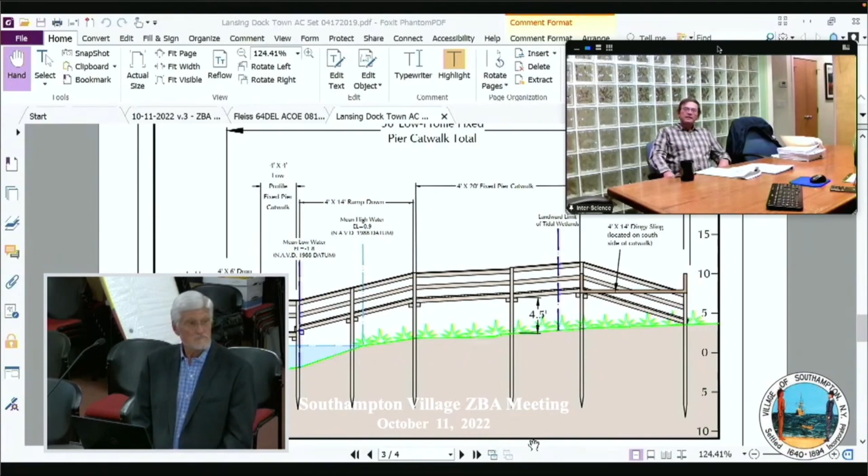Sure, and it's identical at 405 Captain's Neck Lane, which I went to and measured to make sure Ken Mockridge built the dock correctly. It's 4.5 feet to the bottom of the girder. The ledger boards don't count, but the concept is the Army Corps of Engineers won't approve docks that aren't 4.5 feet above the grade of vegetated tidal wetlands, because they want the wetlands vegetation to exist and do well underneath the dock. It's as simple as that.

The through-flow decking helps. It's 60% transmissive, but no matter where the board might end up, with this dock we would always have to provide exactly the Army Corps specifications, or we won't get approval at the federal level.

The DEC will require the kayak rack to be out of the wetlands, period. So that's fine. The drop platform is routinely approved by the DEC. It's routinely approved by the Army Corps of Engineers, and we have a ladder down.

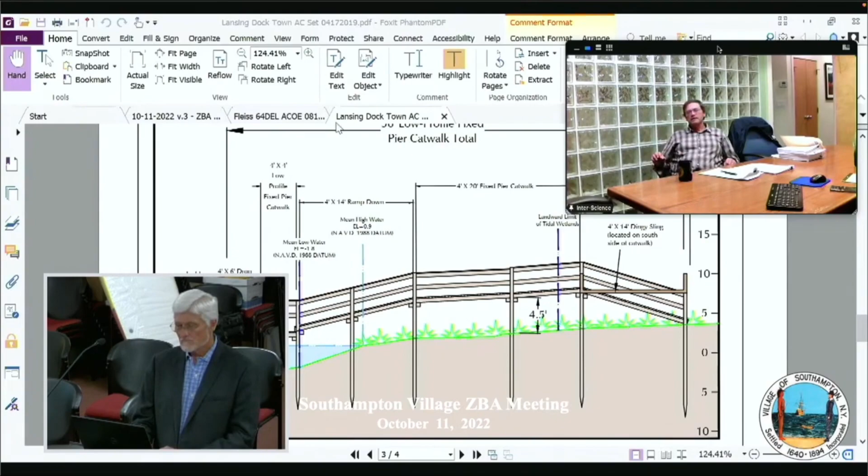These things are required by each of the regulatory agencies, and sometimes there are conflicts, but by and large those conflicts have been resolved, and these types of issues have been understood by the town, the state, and the federal government. And with docks in the village, we have to consider how the building department regulates the handrails, but in all regards, the design is intended to protect the wetlands.

It's an open pile dock with through-flow decking that's light transmissive. The handrails are designed to not be visible more than they have to be. And the little drop platform at the end gets people into the creek so they can use a kayak, and it promotes recreational use of a water body, which the Department of State particularly supports.

We always design the docks to be tropical hardwood because that is the easiest way to make sure there's no treated lumber in use in the town of Southampton. I don't think I have anything else to say in terms of the dock design.

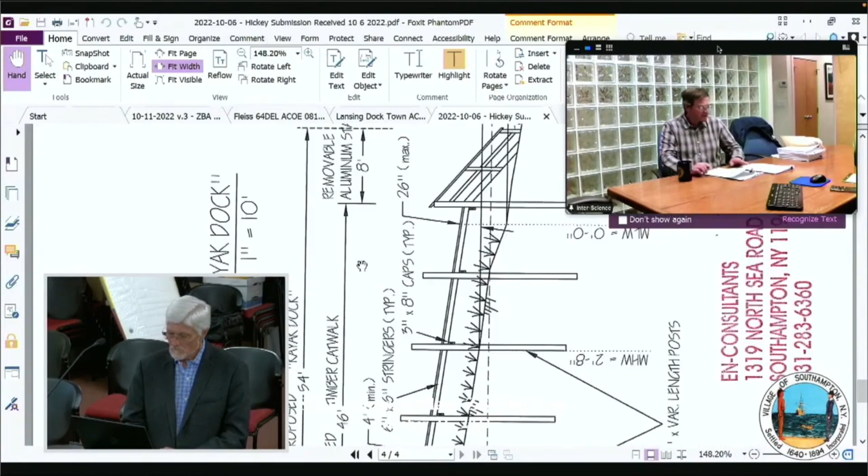But this office tends to be receptive to board input, and I will certainly show where the tree is. I think that's okay. Putting a kayak rack inside the fence area is probably okay.

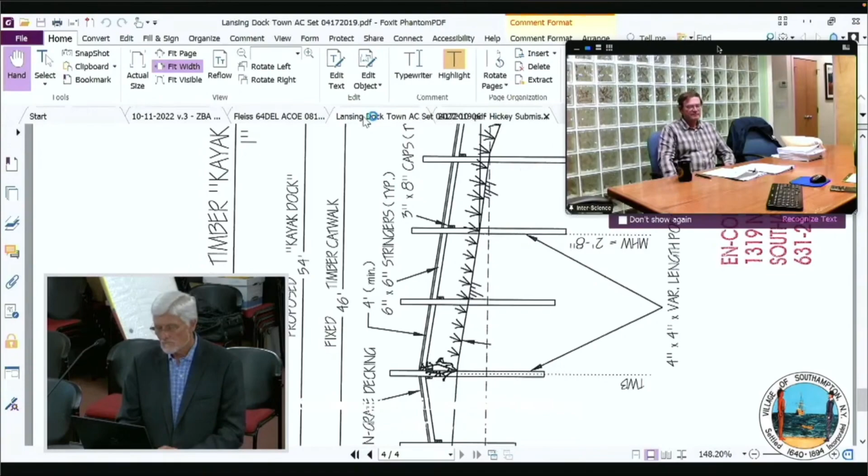You have to remember, this is a Phragmites shoreline with a strand of wetlands vegetation along the edges. And most of this will not be able to be seen. It's got 15-foot high common reed on either side of it.

Moreover, the property owner to the west is Jocko Rittenbow, and the extensive wetlands plantings over there, including eastern red cedars, and the buffer area above will hide this dock, period. You'll never be able to see anything from the water short of a little drop platform. It will be at the edge. The rest of it's going through Phragmites, and it has a ramp down through the fence to the lawn.

So are we near a tree? Maybe we are. We'll certainly respect that village question and find out exactly where that tree lies.

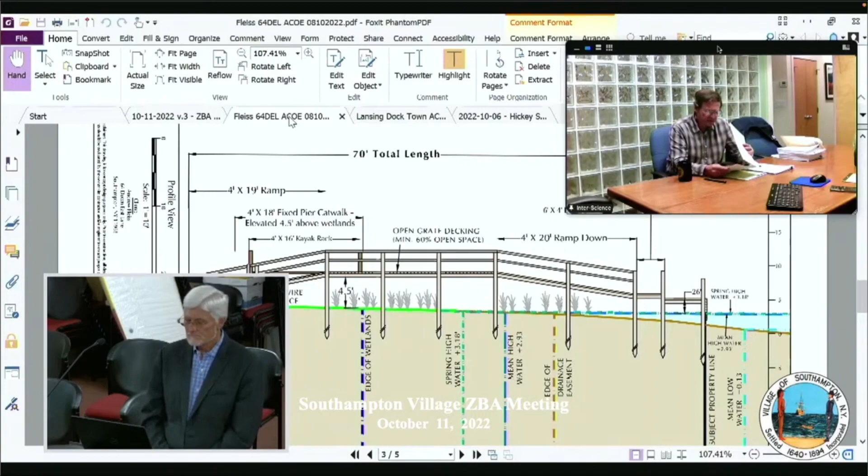And would my client be willing to plant some vegetation along the fence to buffer the wetlands issues? I will talk to him. He's moved his family to this property from a different place in the village, and I think he's very excited about continuing to use the water. That's the whole idea, to use a kayak dock to access the water. But we'll take a look at the mitigation that the board has looked at, and we'll come back to you.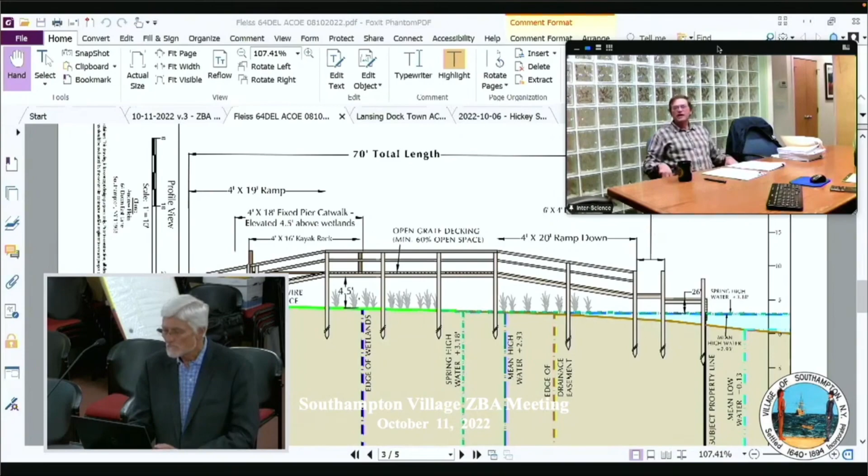Okay, and why is it as close to the property line so as to require a setback variance? There's a very practical reason. This is a shallow arm of Hetty Creek, and we're putting it close to the edge of the property line so we can access the water in the most reasonable way. Same exact reason why 405 Captain's Neck Lane has a dock that's 10 feet off the south property line.

Well, I guess what I'm asking you is, could it be located where it would not require a side yard setback variance? It doesn't require a side yard variance anyway. 405 Captain's Neck Lane has no variance. No, I'm only talking about this permit application, Jim. It says here that you need a setback variance for an accessory structure. That's from Alex Wallach, and I spoke to him at the time he noticed the property, and he told me he was going to notice it for a variance.

My position is there's no variance required. There wasn't a variance required at 405 Captain's Neck Lane, and it doesn't appear to be reflective of village policy to require variances for docks. Moreover, a variance is required here? Really? We're going to notice, submit, and have a variance discussion from Carl Benincasa in that regard, if that is the position of the village.

I really don't believe that is the case. I don't believe much has changed in the village code regarding docks since 2019 when I got the permit for Sims Lansing. However, we'll submit the variance discussion to the board for your next meeting, along with making adjustments to the design to meet the village concerns.

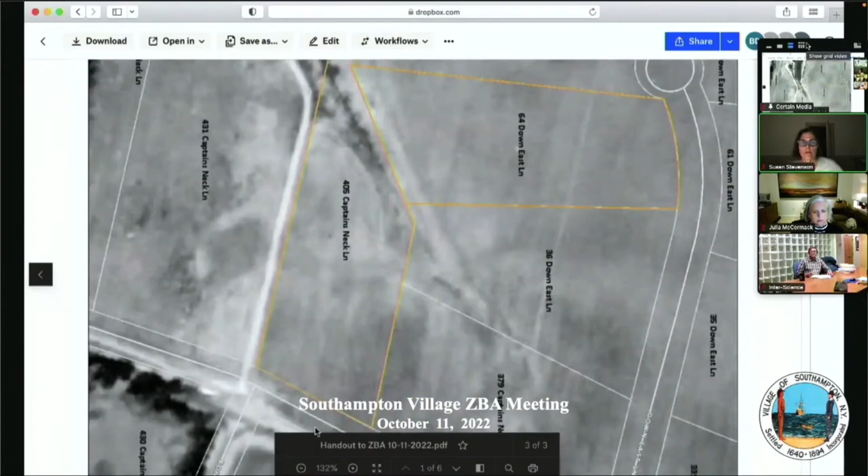The purpose of this is I believe the underlying permit recently granted by the trustees of the freeholders did not take into account this drainage easement, and also did not take into account that this is not a natural creek - it's a dug drainage channel. It's shown on the 2019 drawings and surveys prepared by InterScience, but not shown here, indicating it is an artificial extension. The 1962 aerial shows what this creek looked like, and the following page, the 1976 aerial, shows how much this was widened pursuant to the drainage channel.

Some of you may or may not know this, but I used to be counsel to the Southampton Town Trustees, so this is an area that I know quite a bit about.

With respect to the permit granted by the trustees, it's conditioned upon receipt of all permits, including the one from this board, but I think there are jurisdictional defects with the trustees' permit. This is also something this board needs to look at, because I've read the deeds for these two properties, and normally when you have waterfront property, the boundary is described as going to the waters of such and such body of water and then along the waters of that body. You don't have that here, because again, this is a dug artificial canal.

So the metes and bounds descriptions for both of these properties - you can see in the 1962 aerial and this 1976 aerial, these have the tax map overlay. As you can see, the property boundary for 405 Captain's Neck goes all the way to the boundary of 64 Down East Lane. So I believe we have some underlying title jurisdictional issue, and we need to look at that easement.

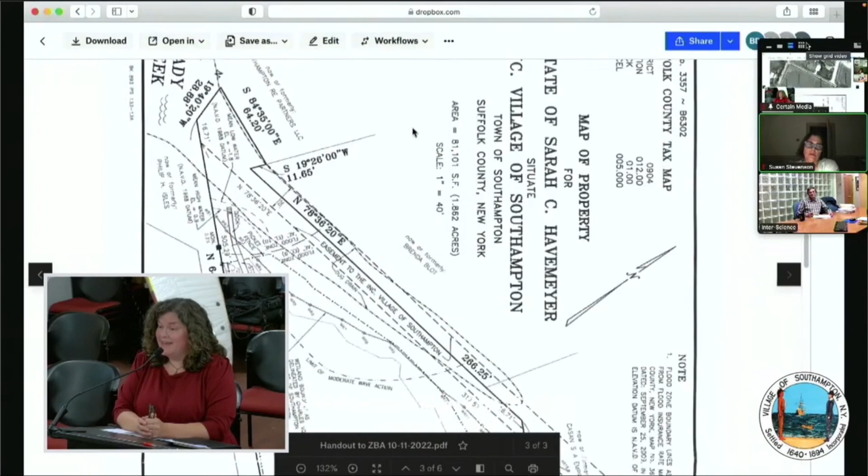And again, that easement - if you think about it - is because at the time it was granted, this wasn't underwater land, this was actual land, right? And that changes a lot of what we're looking at here with respect to the trustees' jurisdiction and everything else.

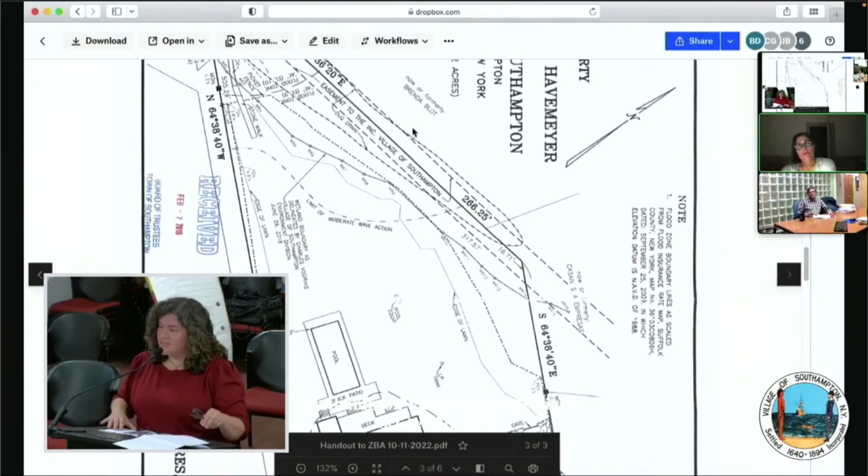Can you help us by providing the deeds for 405? Sure, I apologize, I normally like to walk into this with a better put-together written statement, and that will be forthcoming. We were just recently retained, so this was what I was able to put together as I was doing my due diligence. This is great, so I just wonder if you could locate the surveys for 64 and 405 in the deeds. Sure, you can submit it whenever it's ready.

Maybe- Yes, I see we have 405. Maybe a question for Jeff or for Chick: are docks allowed to cross village easements?

I think we have to look at the easement. You say no? Well, I'm not saying no, it depends on what the language of the easement is. So we need to look at that first. Each easement is unique.

What year was the easement written in? I don't know the year. We only have a liber and page number, which is listed on the applicant's survey. Let's see, the second to last sheet in my handout shows a liber and page number of 5780, page 86. Thank you. I don't have my reading glasses. Thanks, Chick.

Based on those numbers, I would say it's probably going to be something in the 70s or 80s, maybe the late 60s. It's hard to say. Would an easement even contemplate something like a dock?

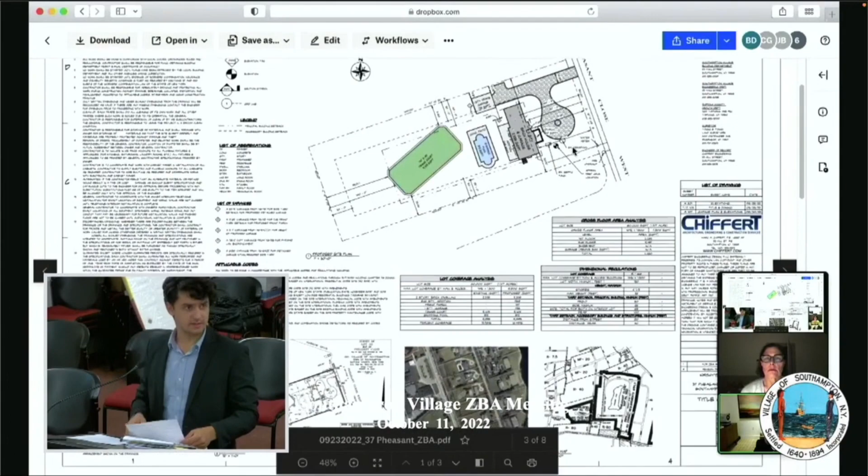So here we have a case of a detached garage that we can see on the site plan, basically along that northwest property line. And then we also have a new front porch, if you zoom in on that site plan up there. The top. Yes.

Excuse me, can I ask that you state your name for the record, please? My name is Louis Puccio. I'm representing Chiffert Engineering and my client, David Kershey.

So here we have a garage that is encroaching—I believe it's 20.13 feet from the accessory setback. It's about 10 feet from that property line. And then we have the front porch, which is about, I believe, 17 feet from the principal building—or no, accessory, also accessory setback line.

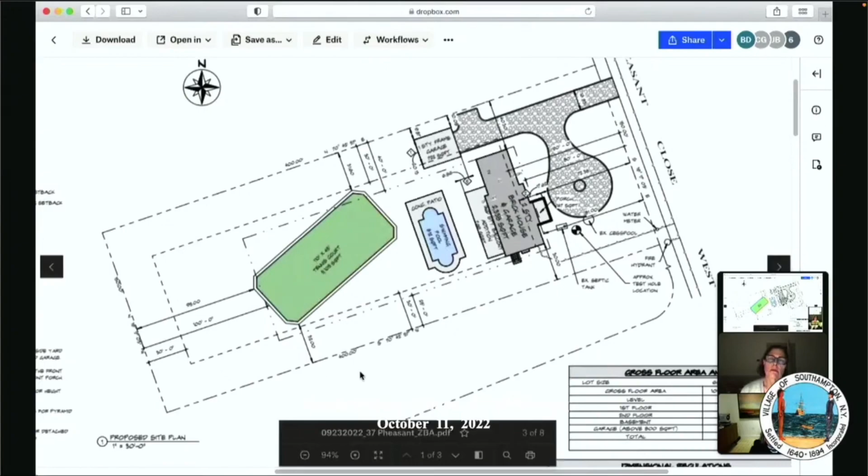So in this case, as we have the garage shown, it does not produce any undesirable change in the character of the neighborhood. This is because the garage that we have shown is set back 10 feet, so it won't create any kind of undesirable shading. There's also a row of privets along that property line, so the majority of the garage will be shaded by that row.

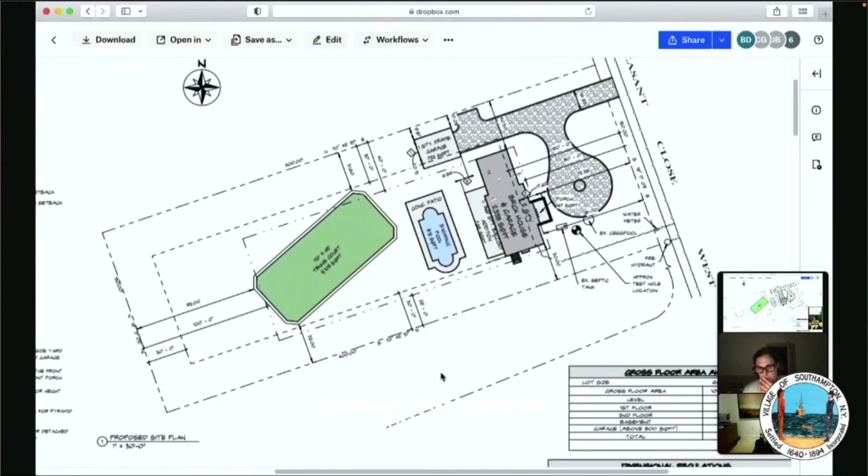I believe we also did not put any windows on that side of the garage. If we scroll down on that plan, there should be an elevation showing this.

I guess we did have windows, but if need be, we can remove them from the side that abuts the neighbor's property line.

In regards to the front porch, this is also not creating any undesirable change in the neighborhood. Many of the properties in this neighborhood do have covered front porches of similar nature.

In regards to the pyramid encroachment, we could try to lower the pitch of the garage roof. However, it would create an undesirable separation and difference in the architecturals between the existing building and the new proposed detached garage.

None of the variances are necessarily substantial. They're all fairly minor with regards to what's been proposed, and they do not have any physical or environmental effect on the neighborhood.

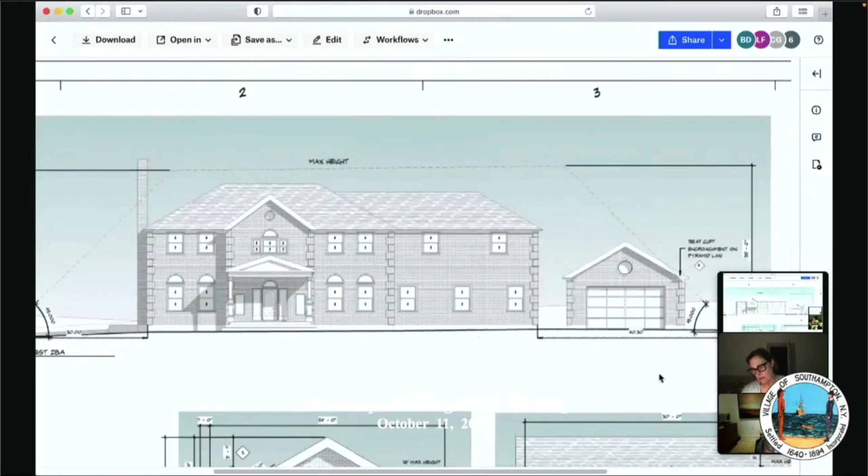And these variances are not self-created due to the fact that these accessory structures have been placed in what we believe is optimal to keep the architecturals in sync while also maintaining the functionality of the proposed structures.

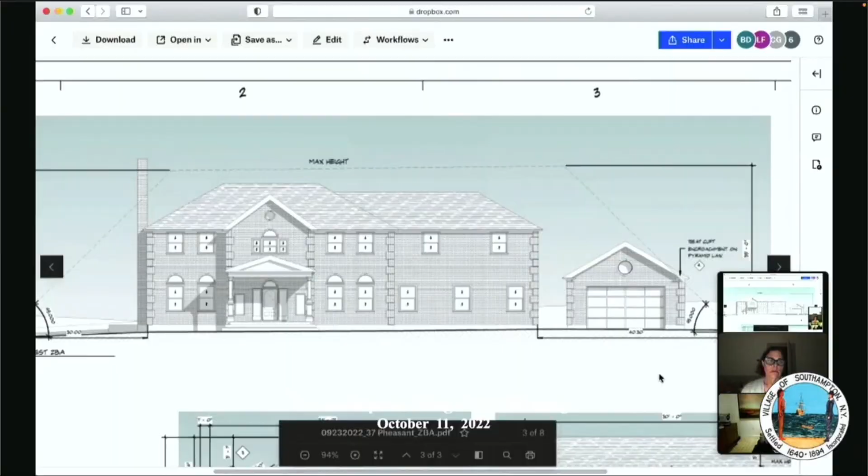Do any board members have any questions or concerns? I have some comments. I beg to differ. I don't know why the garage would not be functional if it would actually meet the zoning code.

I believe that all of these variances are unnecessary, that someone needs to figure out how. The front porch isn't necessarily self-created because the house is right up against the principal setback line, so in order to add anything to the front facade of the house, it would require a variance. Correct.

Was this house built without an attached garage? So originally it had an attached garage, and the homeowner would like to convert it into a ground level master suite for his elderly parents who plan to move in. To combat this, we've created a detached garage, a separate space for him to work on his cars or whatever he may need to do.

Do we have a plan of what's actually there now? Just show us, we're missing something here. Where is the actual state of it? If you look at the title sheet and scroll down a little bit, to the bottom left, there is an existing survey. There's a lot of pieces of paper, but can you put it on the screen?

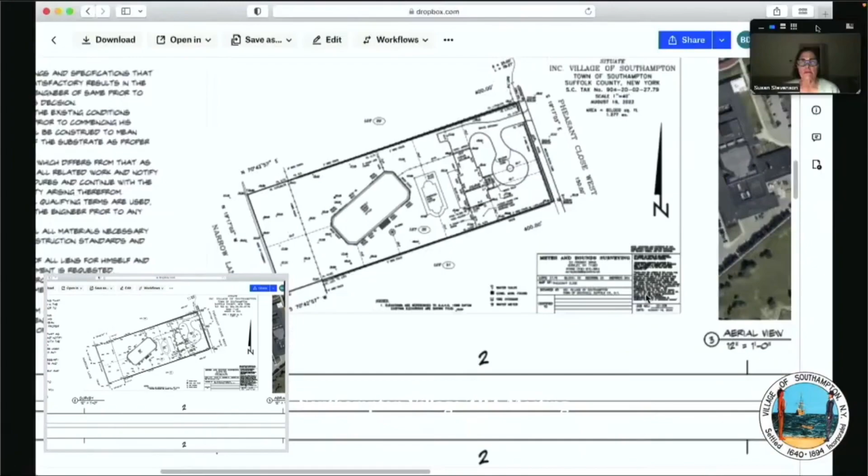But the existing attached garage wouldn't have calculated towards GFA, but now it will. Now it does, so you're correct, and I believe we do have a GFA calc that shows we are within the allowable GFA, if you scroll up a little bit. To the right we have a bunch of tables. We also have the lot coverage, which is within allowable zoning.

Go right a little bit and then up more, I believe that's where, if you scroll up a little bit. Even with that tennis court, you're clear on the lot coverage? Yes. You're only like an acre and a quarter, right? Yes, it's 60,000 square feet, the lot. Acre and a half.

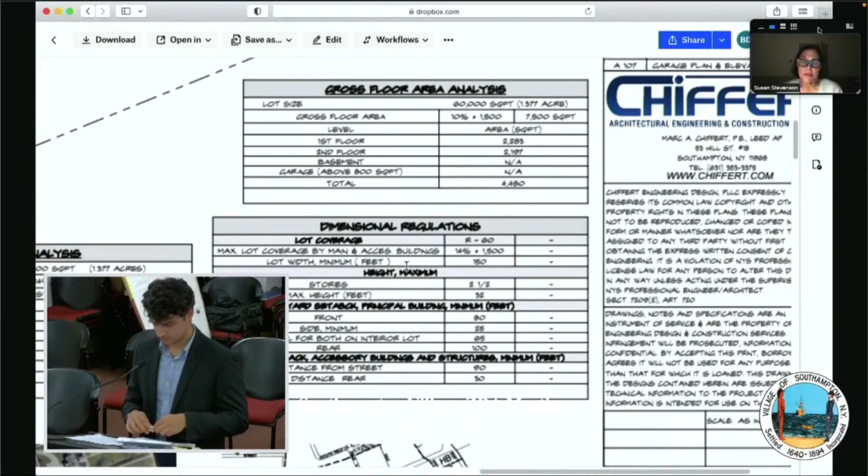Well, from my perspective, you're cramming a lot onto the property, and I do think it's detrimental. This property could be developed within the lines of the zoning code, and that is what I personally expect.

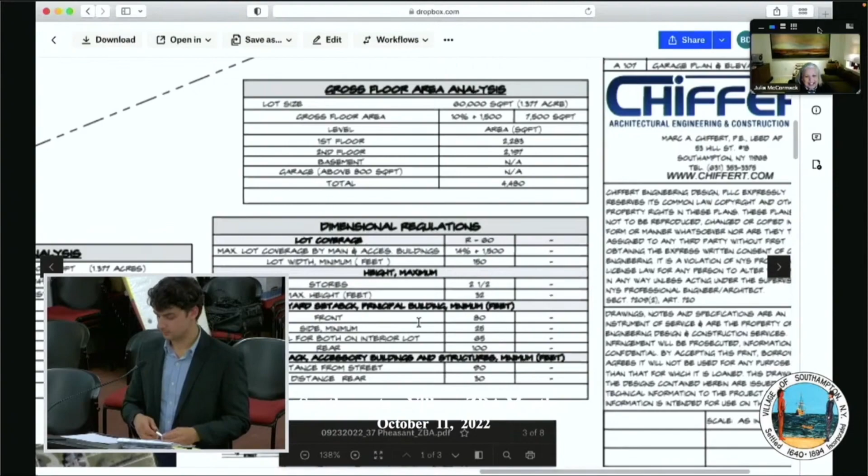Julie, do you have any comments? I'm just trying to figure out the tables at the moment, Mark. Give me a sec. Well, while you're looking at that, one thing I can't really agree with is if you're asking for a garage to be located less than 10 feet from a property line, and the setback is 30 feet, that's substantial. As one of our criteria to follow, there's no doubt in this board's mind that that would be substantial.

Also, I think frankly, having the windows on that side yard is problematic for the neighbor. Right, so we can certainly work with that and remove those windows.

Yeah, I think you need a new location for the garage. Push it back, push it towards the house, push it behind the house - take care of your need for a variance for an accessory structure in a side yard. So push it back, maybe decrease it so it's only a one-car garage. Then you can move it west so you could eliminate the need for the side yard variance.

Lessening the square footage will shorten your rise and run. So you'll probably take care of your height variance request. Speaking only for myself, I don't really have a problem with the front porch, but I think you can do the garage in a way that doesn't need any variances. Okay.